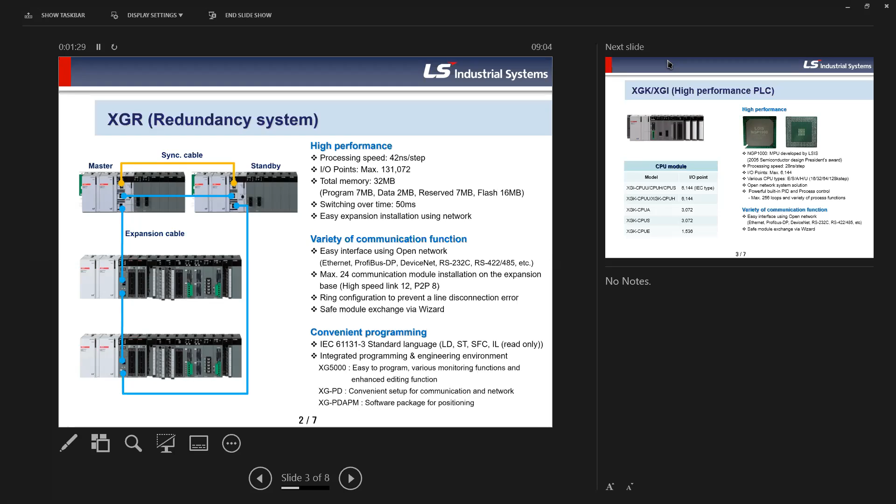It also supports IEC standard language programming. And the nice part is the XG5000 supports the entire range of PLCs. So you don't need a piece of software for the XGR, for example, and another piece of software for the brick — it'll be the same software for the entire range.

Then we have our XGK, XGI high performance PLC. This is our number one selling rack with a range of CPUs. As you can see, you've got the CPU-U, CPU-A, CPU-S, CPU-E. Obviously each CPU has its own strengths when it comes to I/O. Once again, variety of communication networks, built-in PID.

Then we've got our XGB, XEC bricks, obviously our number one sellers because of their price point and convenience of use. So we also have fast processing, 83 nanoseconds per step, maths operation, 7-stage expansion points on the XEC, and obviously designed for small to medium-sized systems.

Also comes built-in with 16-loop PID control, built-in 232 and 485 on the SU and the U. On our E, which is the economy PLC, it has 232 and 485, but you can use either or. They also come built-in with high-speed counters, and if you get the transistor version of the PLC, it comes built-in with high-speed positioning as well.

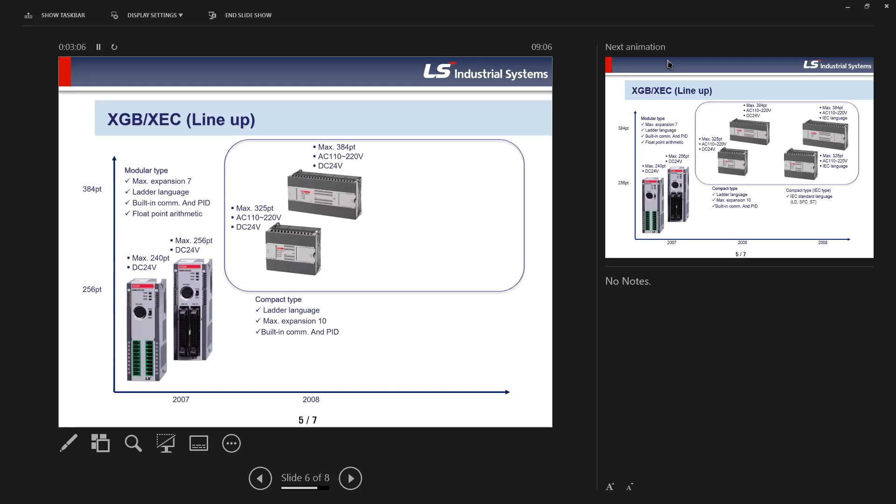First we have the modular type, which is our little PLC, a little cigarette box type PLC. Then we have our major bricks, up to 384-point I/O, starting with the SU and the E.

Our HMIs — actually this needs to be updated. We have our new range of HMIs, which is actually not on the slide, which are the EXP and our IXP2 HMIs. And then we have smart IO expansions, extendable IOs that can all be used with our range of PLCs.

Okay, so that's just a simple little lineup of the PLCs that we have. I'm just going to stop sharing this screen, and then I'm going to go into XG5000.

Okay, so this is XG5000. I've opened the program already. Generally, what happens when you first install XG5000, you're going to have all these windows pinned. So what I generally do is I unpin them, let them sit at the bottom so that you have more space to program. I'm sure you guys notice if you've installed XG5000 already, that all your operational bars are open. So in that case, I just minimize them so I got a nice clean screen to start with and make things a bit easier to program.

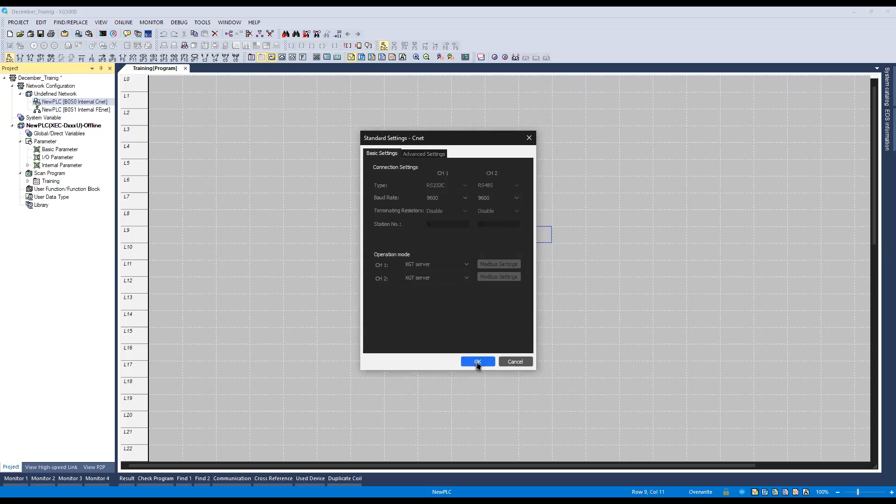Okay, so we're just going to leave it as XGT server for now. Say okay. Okay, then if we double click on Ethernet - okay, hold on, let me just change my colors so it makes things a bit easier for you guys. Give me one second. It's not the best theme.

Okay, that's much better. Okay, so under Ethernet settings, we got a station number. Station number is related to when you have multiple PLCs connected onto the same network. So obviously, if you want each PLC to talk to each other, each one's going to need its own station number. Then you can set your IP address here to whatever you want it to be. And as with the CNET, you got the choice of XGT server and Modbus as well. So I say okay, we can leave that as default for now.

Then you got your system variables. As you can see, there's nothing in there at the moment. That's when you actually add variables into your system. And then you got your global variables. Your global variables are used if you've got multiple programs in a single project, allowing each program to access a global variable, whereas a local variable is for that particular program only.

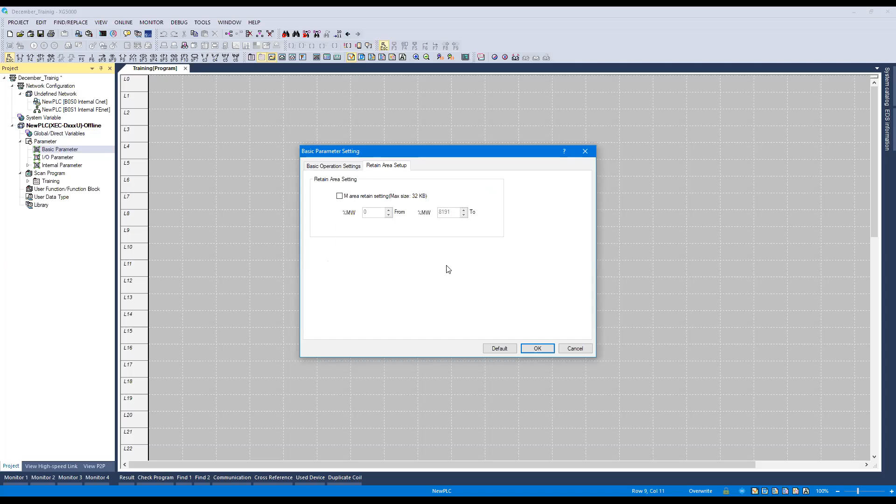Okay, then we have basic parameters. Basic parameters tells you your scan time, basically how long it takes for your PLC to scan your program from top to bottom. And then you have your retain area setup. Retain area is areas where you want values to save after power down. So if you power up, and you got a value in a certain register, let's say from marker word 0 to marker word 10, all values within those addresses will remain after power down. You power back up, you got a value of 10 in there, for example, the value of 10 will remain in there. But there are other ways of doing retains. This means you basically have to structure your program to make sure that your retains stay within that area.

Then you have your IO parameters. IO parameters are important - this is where you add your expansions in, where you add your different IOs in, and where you tell it what PLC you are actually using. So the way it works is you have your base PLC, which is slot 0. On XECU, for example, we got your main, which is your main PLC. We can tell it that it's, let's say, a DR28U PLC. If you double click on there, then it tells you here you have 16 inputs, 12 outputs. So it adds this in. This is your actual brick PLC that you've purchased from us, and that's your slot 0.

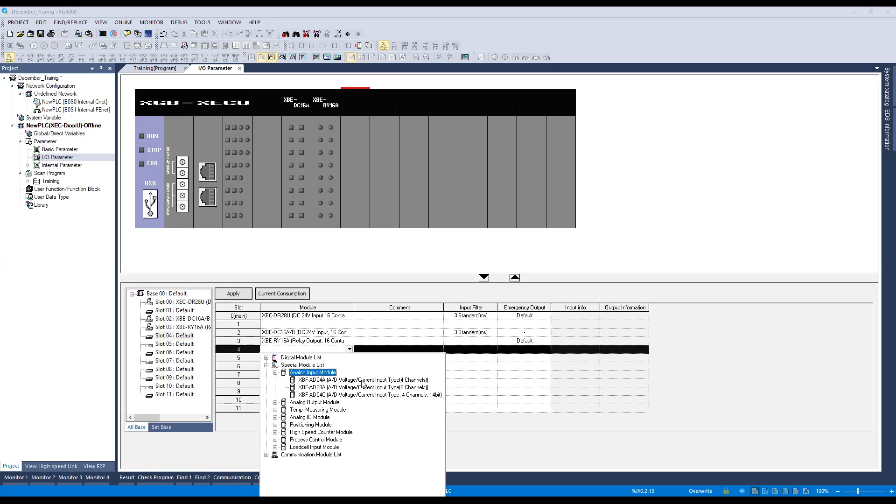Let's also add in an output module, say a 16 channel relay output. It gives you the description there, so you know what it is, and you have the choice of transistors as well. Then let's add in an analog input module, a 4-channel analog input module. And then we'll add in a 4-channel voltage output. You get a DV, which is a voltage output, and DC, which is a current output. So let's just say DV for now.

So what we have in our PLC is our main brick PLC, which has 16 inputs and 12 outputs. Then we've added another 16-channel digital input card, 16-channel relay output card, 4-channel analog input, and 4-channel voltage output card. Very importantly, as you can see, we can go up to 11 expansions if you need to, depending on the size of your project.

So very importantly, what we need to do is click apply. This asks if you want to register your variables. Say yes. This mainly relates to the analogs, because the analogs have dedicated variables to read and write to. I'll show you how these are used in the program once we add them in. Say OK, and that registers your I/O parameters.

If you want to change the settings of your analog, you can still, within your I/O parameters, double click on that. It tells you, okay, my analog input, I want to enable it for channel 0. I want it to be a 4-20 milliamp input. This gives you your range, which is your raw data range. So basically, if you are reading 4 milliamps, you're going to read 0. If you're reading 20 milliamps, you're going to read 4,000. If you're reading 12 milliamps, you're going to read 2,000. That's the raw value that you are going to read.

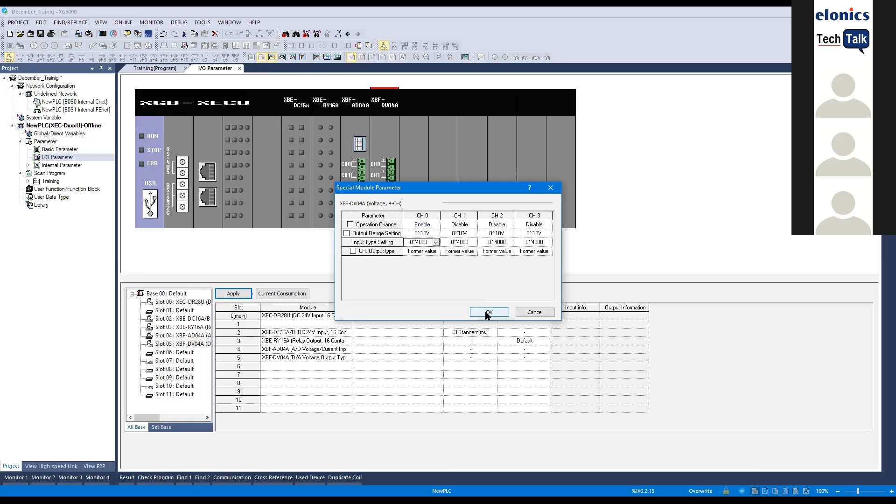So you say OK, let's enable 2 channels here, and apply once again because you made changes to it. As you can see, it didn't ask you to register because it's already registered. You just applied the setting changes you made to your analog inputs.

Now this PLC also has internal parameters. It's got a high-speed counter, which we use for encoders or high-speed processing with proxies, basically any high-speed input that requires to be counted very, very fast. I'll go through that once we do the basics initially. Then we've got a 16-channel PID loop for controlling pressure, controlling speed, etc. And then we have a data log as well.

It's only on an XECU PLC.

Okay, so let's get back to our project window. As I mentioned earlier, your PLC brick, your main PLC, is base 0 and slot 0. Let me just have a look at something.

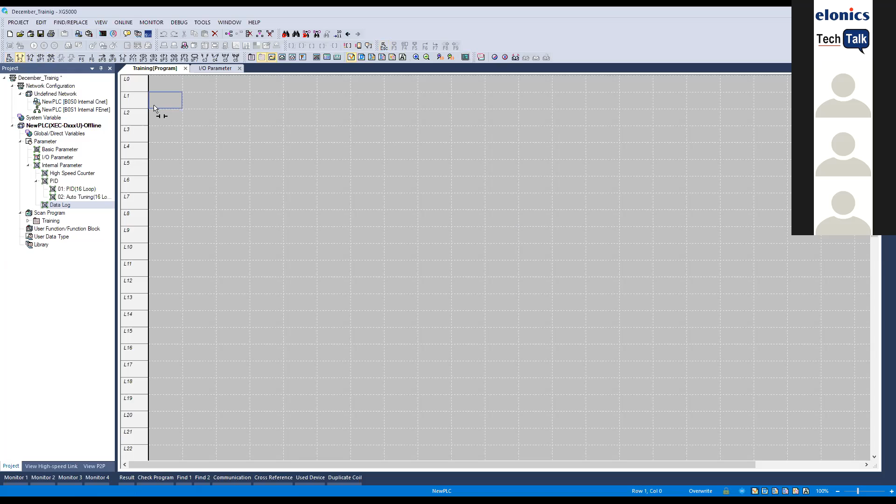So the way that works is, let's put in a contact. As you can see here, you've got normally open, normally closed, a rising edge, falling edge, and little shortcuts as well. So what makes it easier is you don't have to always click on there. If you press F3, you're going to get a normally open contact. So let's click on here.

So what this does now, it opens up your variable window. Right now it's listing all your global variables that are listed here, and these are all your analog global variables that were automatically created when you added them into your IO parameters. So we're just going to create a local variable for now. As you can see, there's nothing in the local variables because nothing has been created.

So initially, we can give the variable a name. I've created a normally open contact, and we want to give it a name. So let's just say we'll call it the start button. If you look at the names, the PLC program does not like spaces, it accepts underscore or no space at all. So to make programming a little easier to follow, you can put an underscore in and say start_button.

Say OK, so it pops out now. Because it's a contact, it's going to be a Boolean. A Boolean is on or off, it's not going to give you a choice of anything else. A variable, it's a variable constant - obviously it's not going to be a constant because it's going to be a contact that's changing. And a variable external is when you set it to a global variable. But right now, we're going to work with a local variable just for the single program.

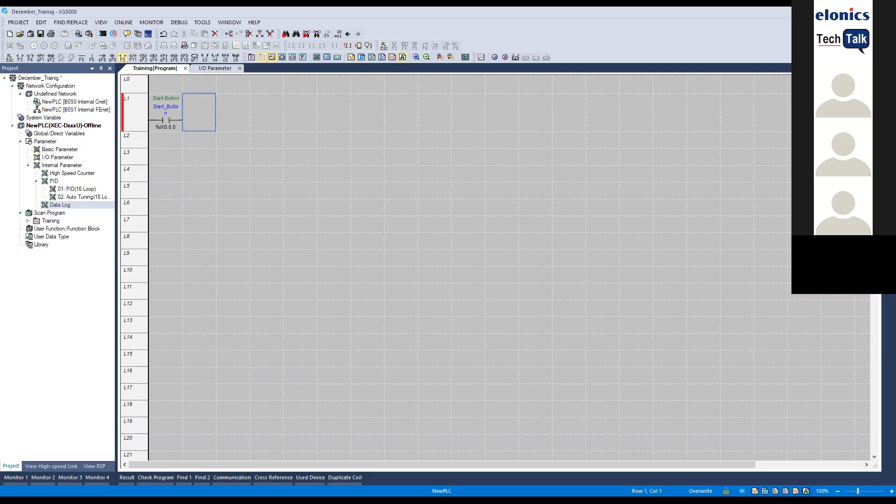Okay, so now we've got a start button. Now we want to give it a coil, an output. So you can see here, coil, F9, go there. Click anyway, it's going to load it on anyway, and we can say motor start.

Say OK. So now obviously this is going to be an output, but once again, it will be Boolean because it's an on-off - it's going to start or stop. Now we're going to give it an output address. Outputs are very similar to inputs, except it's going to be a Q. Q is for outputs. Let's say we want to use Q0 as well, the first output of the PLC. So it'll be base 0, slot 0, output 0.

And we can call it motor 1. Let me unpin this so we have a full view. So as you can see, you've got your start button. If you press it, if your start button comes on, your output's going to come on.

Oh, good. But now we also have, okay, great. So let's create a little latching circuit as well.

So let's say we want to put another contact in there. You see that your motor start, the variable that you've created, is available for selection, so you can double click on motor start. Let's join a line, you can use a line there using F6, click on there. So what this means is, if your start button comes in, if it's a push button for example, it'll pulse, it'll start and it'll latch.

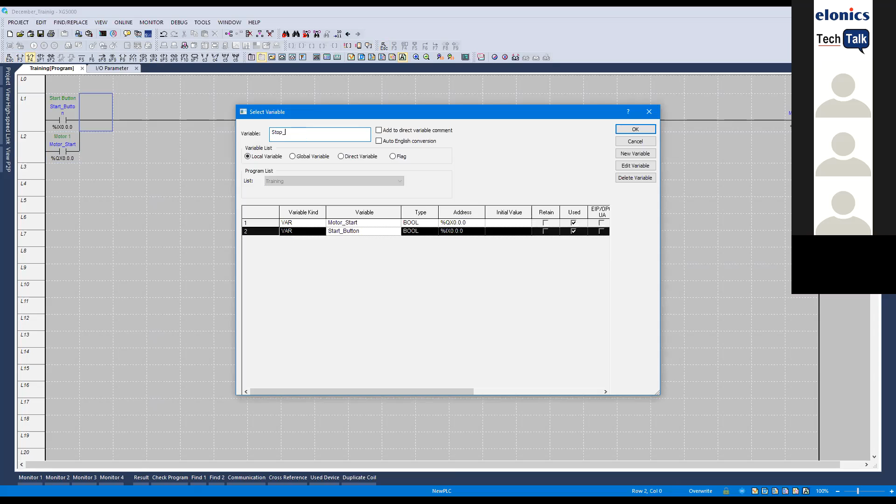But obviously you need to break a latch, so let's say stop button. Press enter, and I'll show you here. So, 0.0.1 - this shows that input 0 is start button, input 1 is your stop, and output 0 is your motor start. So when you press start, it'll latch, and when you press stop, it'll unlatch.

So that's a little simple latching circuit. Now, let's say I'm writing my program.

I haven't put a comment for this program, so I want to add in a line. Very simply, you can click on there, on L1, and I actually use the shortcut to add a line. The shortcut to add a line is Control L. So that puts in another line, creates another little space. I want to put a comment to say what this function does, because obviously writing a PLC program without comments and coming back to it later makes things very difficult to follow. So comments are actually very important when it comes to PLC programming.

So if you double click on your line, select comment, say OK, and it gives you your own comment. So we can say this is our main motor start control. This can be anything, doesn't need to be, can be any character. It doesn't need to have underscores, it's purely a comment, it's text as it is. Say okay, so that tells you what that function is.

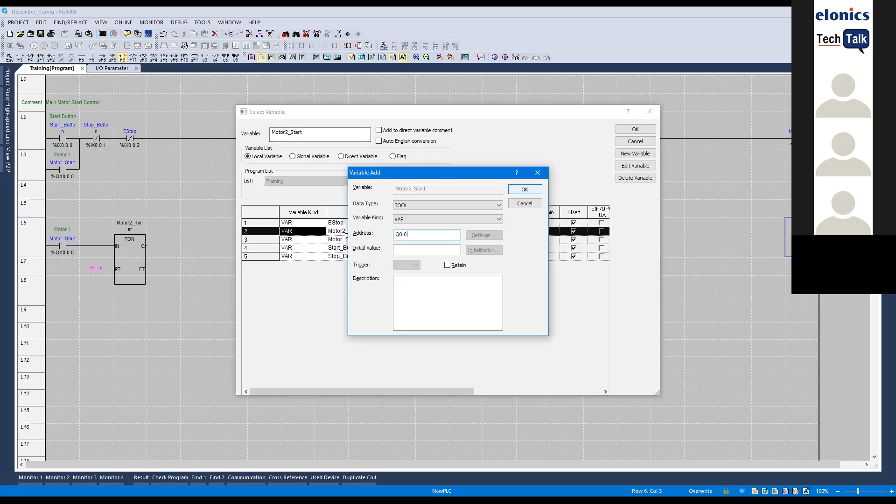Let me show you this as an example - if I say Q 0.0, that's a used address already. If I press enter, it tells me 0.0 is being utilized in the program already, so you can't use that output again. So we change that to 1.

So when our first motor starts, 10 seconds later our second motor starts. Let's add a comment here as well - let's say motor 2 delayed start.

Now we want to test our program. It's a little program - since we don't have a PLC connected to the XG5000 software, we don't want to download anything yet. We just want to make sure our program is healthy and that the function actually works.

You can use the little start-stop simulator button in here. If you click your start-stop simulator, what this does is build your program and simulate exactly the same window as you would write to a physical PLC. So say okay.

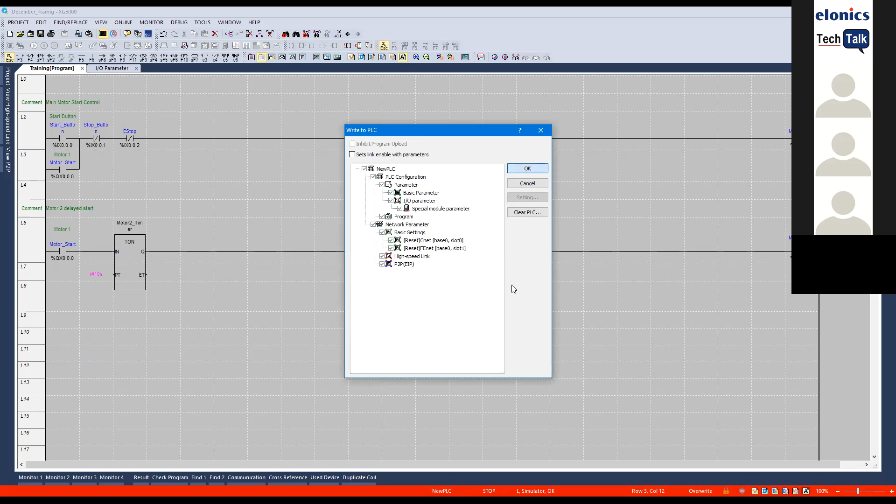Writing completed, and now your PLC is in run mode. As you can see here, you've got a little run button, stop, and it is in monitor mode. These two are normally closed, your stop button and your emergency stop, so it shows blue that those contacts are closed. Now the PLC is in run mode, and at the bottom you've got your green bar showing the PLC is in run and in simulator, and everything's okay.

Now, if I double click my start, technically it should start. But as you can see, I'm trying to force it on, and it's not working. The reason is because this is allocated to a physical input, so it's looking for the input from the PLC.

Double click, nothing happens. So the way we want to test it is we need to tell the PLC we want to force a digital input to come on, one that is allocated. So we go online, say forced IO, enable the force input, say apply, and OK. Now if we double click on there, go to forced IO, say enable and true.

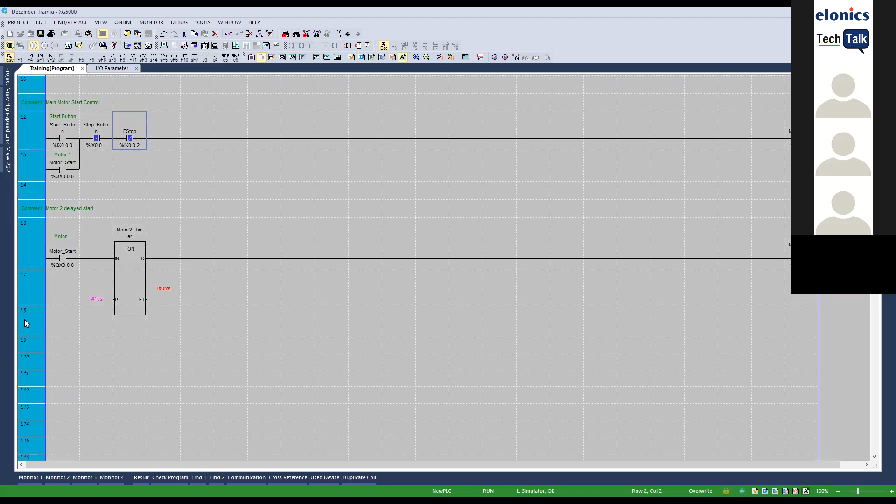You have a little icon here that says start online editing. Click on there, and you can see the bar on the side now changed to blue — that shows you're in online editing mode. So we want to change our emergency stop to another address. You can say eStop, go to edit variable, and we want to make it input 10. Say OK, and immediately the entire screen changes blue to show you that you've made an edit.

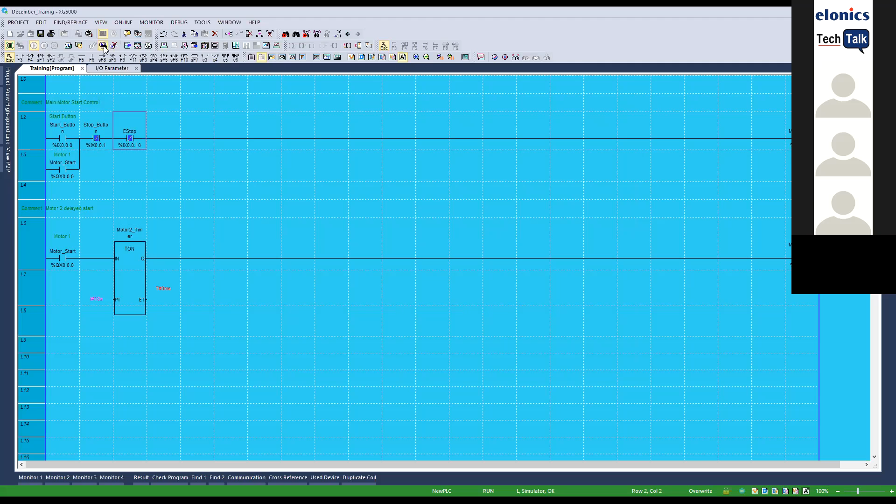Say OK. Now the edit's been made, but it hasn't been written to the PLC yet. To write it to the PLC, click down here, write modify program. It writes it to the PLC — modify program successfully written to PLC. It's still in online editing mode, so you want to come out of it. Yes, and now you're back to your main program, monitoring your program as you would on the PLC itself.

So remember, although I'm doing this in the simulator, the same thing can be done when you connect to your PLC. You're monitoring a live PLC on your plant, but your customer doesn't want to stop his plant and you need to make a small change — you can do that. So to stop the simulator, click on there, and then you're back to your programming.

Any questions so far? That's good. Okay, so the program is quite versatile. Obviously there's many lines — sorry, go ahead.

Yeah, so this timer, this is the input function, right? Yes. So when the input bit in this motor start is on, this timer will start. Yes. So this timer function we can use as an output also.

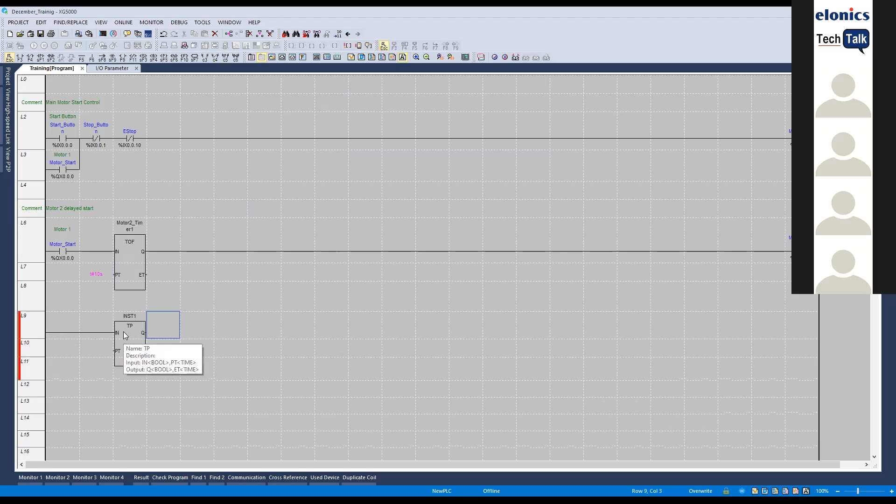Then the other common timer we use is a pulse timer. I'm pressing F10 to bring up the function block window. Type in TP for your pulse timer. So TP is a pulse timer. What a pulse timer does is all it requires is a pulse to start it. So it doesn't require an always on contact, it can require a rising edge, an input that goes from off to on or from on to off. So all it requires is a pulse to start it.

Once it gets a pulse, the output stays on for that duration of time only. So if you got an input that comes from off to on, it'll switch the output on for, let's say, 20 seconds. It'll keep the output on for 20 seconds and then switch off. Even if your input stays on, the pulse timer will only stay on for its duration of time.

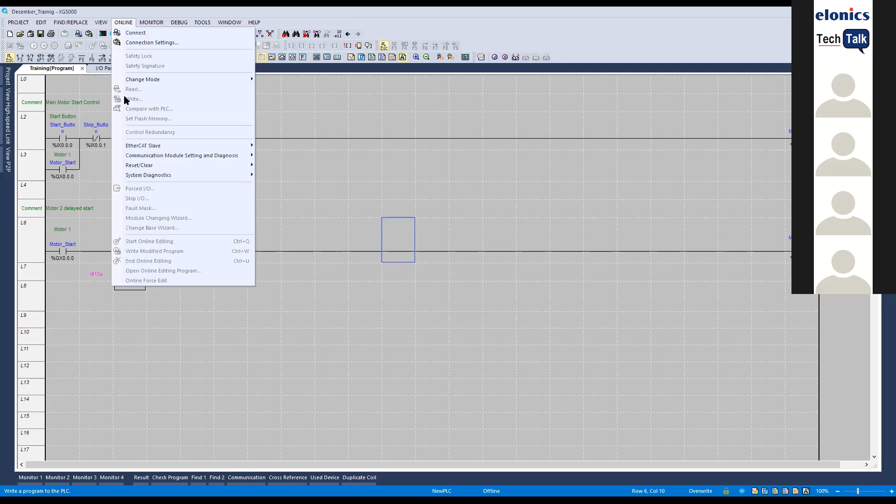So once you select your correct communication method to download to the PLC, you can say connect, it'll connect. Then you go back to online and write to PLC. Okay, so I'm just going to create a little error here.

So as you can see, it's got the red line. So I'm going to say view. Now we're going to check your program before you even write to your PLC. You can click on view, say check program. It tells you what you want to check. Say okay.

I've got this, let me pin this in here, check program. Can bring it up. So it tells me that I have one error. Everything else is fine, but I have one error. So you go through your check window, you see error L02, a device or variable is not entered.

So now, what if you have a huge program and you don't want to go through every single thing to try and find it? What's nice about this, wherever you see your error list in here, if you double click on it, the PLC XG5000 takes you to where your error is. So if I had to put a timer in there, T hash, 20 seconds, error goes away. Then once again, you can go view, check program, no errors found.

Another feature you have is your search function within the program. If you press Control F, that's search for a variable only. So if you know the address of, not the address name, if you know the actual physical address of the device, then you use Control F.

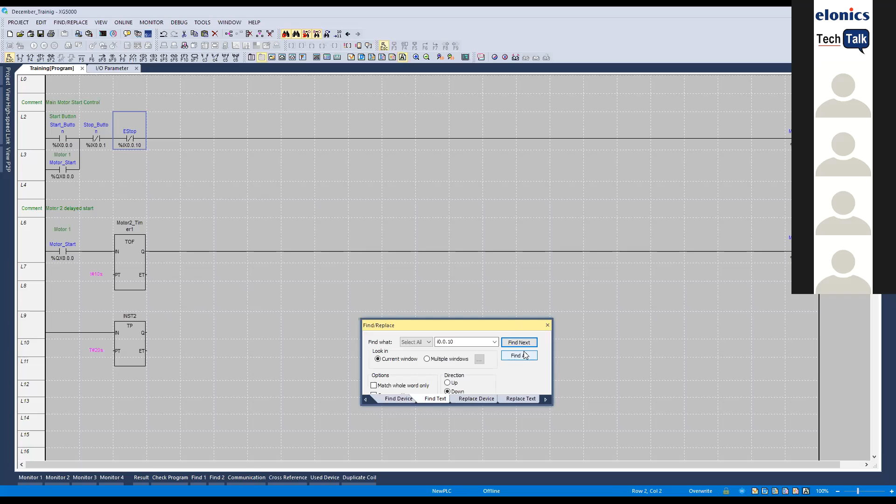Now, let's delete this again. Now, these are just using digital inputs, digital outputs. But what if we want to have variables? We've got analogs. We want to view analogs. We want to view temperatures. We want to write speeds to VSDs. Now, how does that work?

As you remember, in our I/O parameters, we created our analog input, our analog output. So how do we access those? How do we view our inputs? So very simply, I'm just going to create a little comment here to say read

analog input. So now a very popular block that I like to use is a move block because it's quite a universal block. I'm just pressing F10 to open up my function blocks. I want to say move, because the move can look at anything. It looks at arrays, it looks at any variable that can be used. So I use a move block just because it doesn't require an output. So you got your in and your out. It doesn't require an output for it to be healthy.

So I want to view what my analog input is. If I double click on here, remember the analog inputs and outputs in I/O parameters all registered under global variables automatically because you want to be able to access it anyway. So in here, you click on global variable, and here it gives you the list of analog inputs and outputs. As you can see, it shows 4 here because if you go back to I/O parameter, slot 4 is your analog input, slot 5 is your analog output.

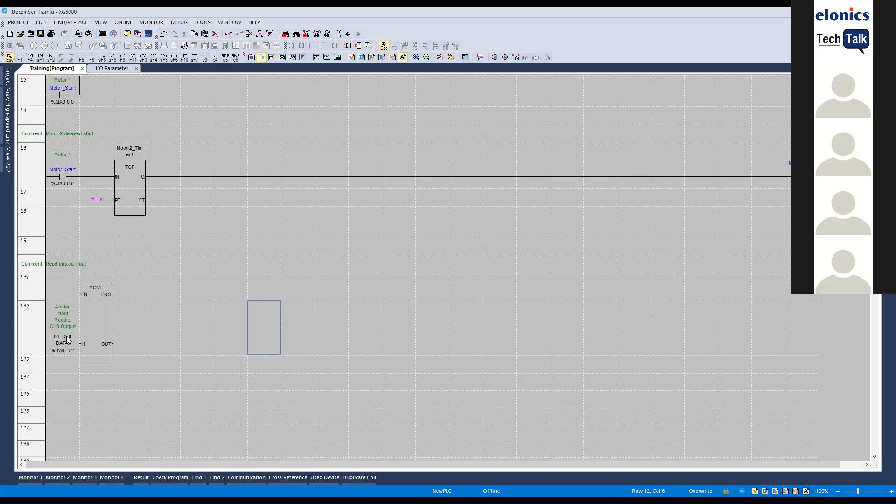So I use this basically as my move block just to test that my values are coming in initially. Before I do any scaling, I check, okay, have we wired up correctly? Are we reading the values? Is the sensor working correctly? If my value is changing here, that means that everything's healthy.

Now, what we can do, what's nice in the XECU, it has a scale block. So I'm just going to press F10 as well. Type in scale. Say OK. So it gives you what the scale block requires. So scaling is X is what is your value, your analog value. I want to take it from there. I'm going to copy that, Control C, Control V. Just going to do it this way.

Okay, then what's your X maximum? We said it's 0 to 4,000. So we're saying 4,000. Your X minimum is 0. Your Y max, so let's just say it's temperature, and our temperature range is from 20 degrees. Sorry, that's a maximum, so it's up to 300 degrees. And our minimum is 20 degrees. So what that will do is at a value of 0, we're actually going to read 20 degrees. At a value of 4,000, we're going to read 300 degrees automatically.

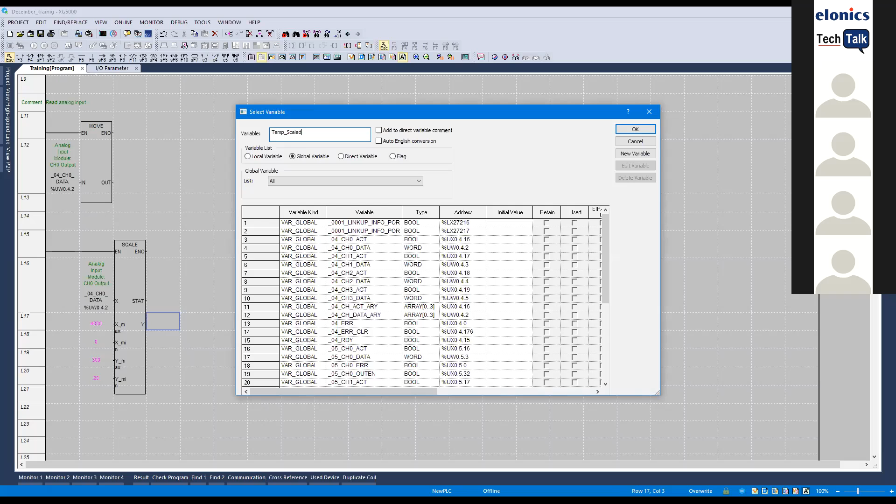So we want to tell, okay, here's our output here, say temperature scale. Now, as you can see here, it's an integer value because our analog input is a 16-bit integer value. So I want to leave that as. Okay, so I want that to be a local variable for now. Okay, integer variable. Okay.

So what that means is that scale block is going to read the analog value. It's going to scale it between 0 to 4,000 because that is the value we're going to get anyway, so we don't need to change it. And it will scale your 0 to 4,000 to 20 to 300. That output will be viewed here.

Now, this is a good example to test. We want to view this value here on our HMI, on our LS HMI. So obviously these values need to be addressed. Now, as it's an integer value, how does the LS PLC address values, integer values, double integer values?

So very simply, we're just going to say edit here again. As we saw earlier in the retain areas, we saw an MW. So MW relates to a marker word, and each marker word is a 16-bit value. Let's say we want that value, our temperature scale value, saved at marker word 0. You start from marker word 0 all the way up to whatever the memory allows. You could put marker word 500, it's purely up to you, but as you structure your program, it'll make things much easier. So we'll say marker word 0, and it tells you here now that temperature scale value is now addressed to marker word 0.

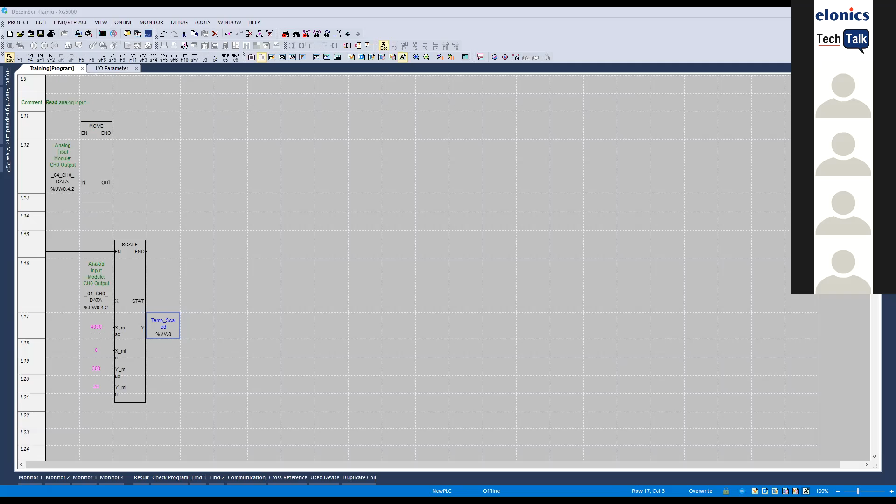Okay, let me see if you can see that. Can you see that now? Yeah, I can see that. Okay, so I just typed in marker word 0 in there. Where did you get the address calculator from? Under tools. Tools, address calculator.

Okay, so marker word 0 is from MX0 to MX15, those are MX1, MX2, MX3, all the way up to MX15. So marker word 0 is a 16-bit register. I'm not sure if you remember your digital systems, but each word is 16 bits and 2 bytes. So that's what this basically explains here. It's MB0 and MB1. So if I had to type in marker word 100, it tells you it's from MX1600 to MX1615, and marker byte 200 and marker byte 201.

Now we also have double integers, which is your 32-bit register. So if I had to do MD10, for example, it tells you it's MX320 to MX351. So that's 32 bits, and now it's 4 bytes, 40 to 43. It's now 2 words, 20 and 21. And MD10, it's long 5.0 to 5.31.

Okay, sometimes that can be a bit confusing. Okay, I'm just going to close that for now. Share my XG5000 again. Okay.

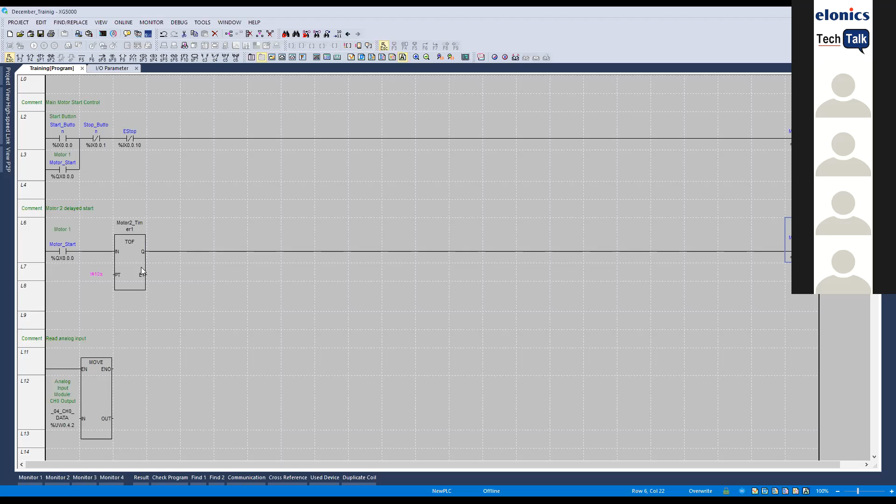So I'm going to create another little comment here: start system via HMI. I'm using an HMI as an example to show how we address it so that we can link the HMI and the PLC together. I'm just going to put another normally open input contact, and I'm going to say HMI start.

Okay, so once again, it's obviously going to be Boolean because it's an on-off. But now this is where the addressing changes. As I put in marker word 0 to read my temperature on my scaling block, now I need an address, a bit address that's going to start by the HMI. It's exactly the same, but marker word 0 now is already used, so we won't use that. Let's say we use marker word 10.

But now marker word 10 is an actual integer value, but we need a bit to start. The Boolean is a bit, it's a start, it's on or off. Now marker word 10 is a full 16-bit register. We just need 1 bit from that register. So to get the bit out of that register, it's as simple as putting .0. So marker word 10 has 16 bits, marker word 10.0 all the way up to marker word 10.15. So by putting 10.0, we are using the first bit of marker word 10. I hope that's clear.

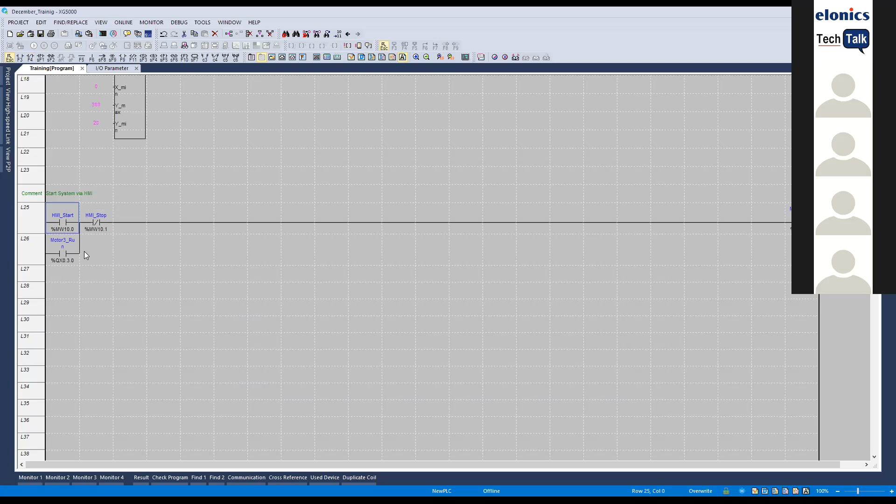And then I'm going to give it another latch here. Click on motor 3 run, join the line. And then I'm going to give it normally closed here and say HMI stop. And now I'm going to give it marker word 10.1. So that's using bit 1 of marker word 10. So you got 10.0, 10.1, Q3.0, 3.1.

Now I'm going to simulate this thing just to show you guys what difference it makes when not using forced I/O, when not using a physical input or output. Okay.

Okay. So as you can see, now we've got our start. But what's different is when it's a bit and not a physical input, as in I0.0.0, if you double click on there, you don't need to go to forced I/O. It's grayed out immediately. Say OK, and it closes immediately. So sometimes when we're programming and we don't have to do forced I/O, we can actually write it without even addressing it.

Click on there to unlatch. And what I mean by not addressing it, this PLC allows you to give it a coil without any address, and it will work. So you can actually create an entire program without addressing anything. So you can test your program fully and then address later. But obviously that addressing later can take time.

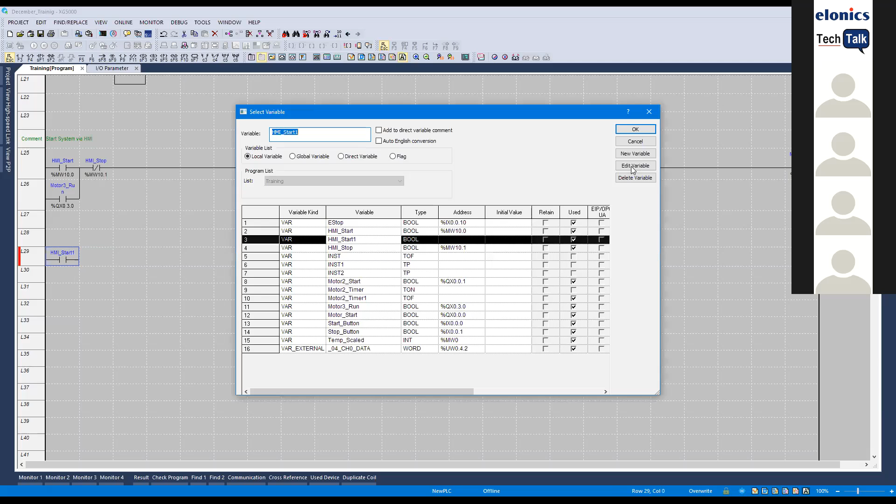So if you want to, it's purely up to you as you program and get used to it, how you want to program. But the XG5000 allows you to create an entire program without addressing anything. You can simulate your program, test all the functions, and then later on start adding your addressing in. And also without having to delete anything, you can just double click on there, say edit variable, and punch in your addresses. You can even go into your local variables within your training program, and list your addresses in there.

So we can actually even double click in there and say marker word 10.2 without having to go into edit as well. So you can create all your variables, have all your variable names in there, and start adding in all your addressing later on. But that's purely up to you how you want to program. You want to add your addressing in at the beginning, which is what I actually normally do. And what I do is normally keep a spreadsheet as I add variables in, so I don't have duplicates. Although it does warn you, I do like to keep an Excel spreadsheet as I program.

Any questions so far?

Can you simulate analog inputs? No, unfortunately not. You can write a value into your scale block, for example, just to see that you're getting values coming through, and to test if your scale block is working correctly. But unfortunately, you can't simulate analog values.

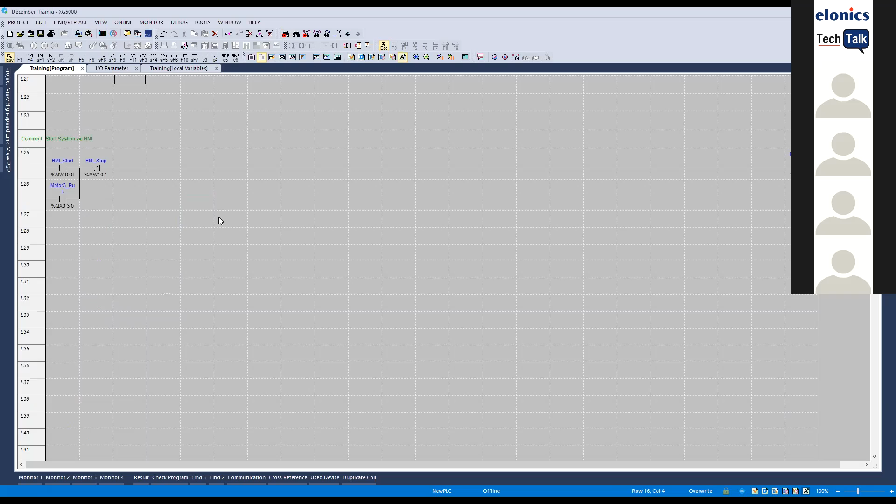So basically, does anybody understand Modbus? Have they done Modbus communication? Okay, let me try and explain how Modbus works.

But we control the speed via communication, which saves you a whole bunch of wiring. So there are certain systems where the entire system is communication—literally just an Ethernet cable between each drive to start and stop it and control the speed. We've actually even done that with the Siemens SIMOCODEs as well, but in that case we're using Ether-IP communication. So we've done a whole range of communication that these PLCs support: Profibus, Modbus, Ether-IP.

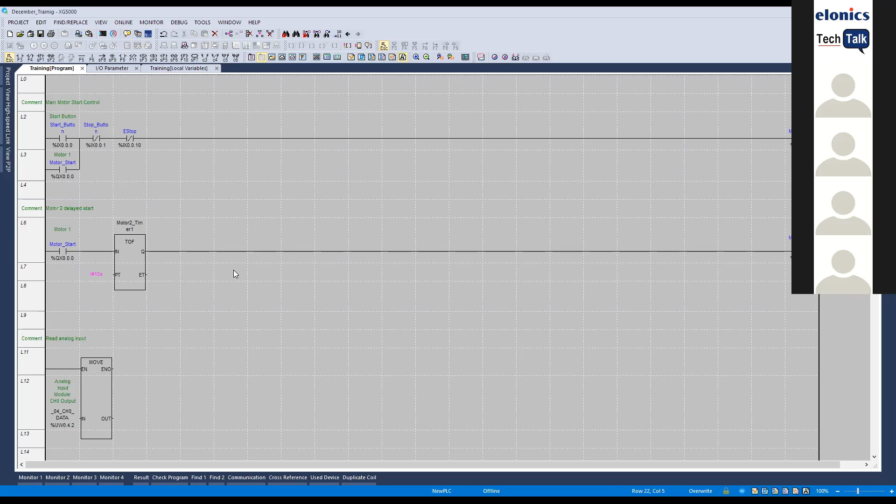We've actually spoken to almost all different types of PLCs as well: Allen Bradley, ABB, Siemens, with the LS PLCs talking to those PLCs. But what we will touch on now is the Modbus communication, because it is the most common, and this particular PLC does support Modbus—we'll look at the Modbus RTU portion of it.

So if we go into our project window, double click on internal CNET, we can use channel 2, which is our 485 for Modbus. Let's use P2P—P2P is peer-to-peer communication, which is what is used for Modbus. And what I'm going to do is use our LS VSDs as an example of communication.

So I'm going to right-click on internal CNET, say add item, and use P2P communication. It tells you it's going to be P2P01. Say OK. As you can see, let me pin that—what it's done is add another pull-down menu for P2P01. I can pull that down further, and now you've got P2P channel, block, and user frame definition.

We're not going to do user frame definition now, just the P2P channel and the P2P block. If I double click on P2P channel, as you can see, because I selected P2P earlier, it shows up here under channel 2. I'm going to tell it I'm going to be a Modbus RTU client. Say OK—driver is changed, existing blocks will be automatically deleted, confirm to continue. Say yes.

And now if you double click on the P2P block, it gives you 32 blocks for communication. So these blocks are your communication blocks to talk between your PLC and your VSD.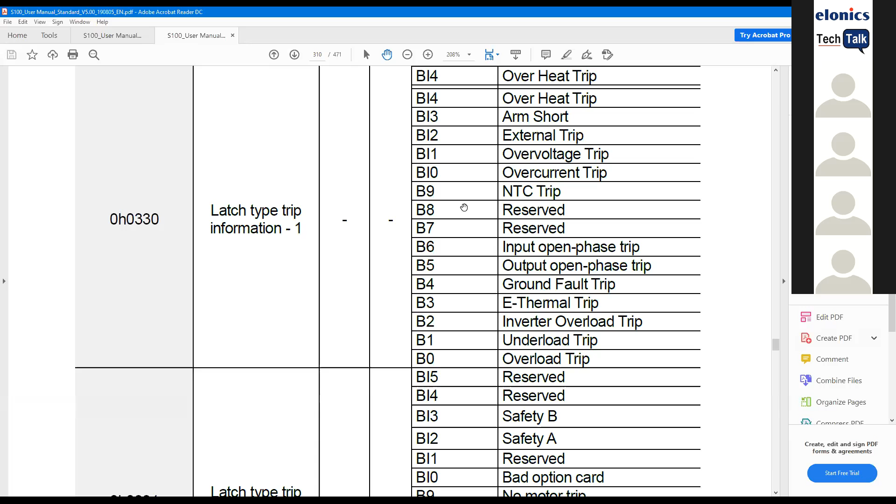Okay, there we go, I'm just going to share this with you guys now. Can you guys see this? Yeah, we can see it. Okay, so let me just make that a bit smaller. So these are your Modbus addresses for your PLC.

For example, I wanted to read the current. As you can see, output current here, and this is your Modbus address right here, it's 0009. So that address is to read the current. If I want to read output frequency, I would read 000A. So it's a hexadecimal value that the LS Modbus requires.

Some devices, like sometimes a Moxa device, give you decimal Modbus addresses. For it to read on LS PLC, you'll have to convert it to hexadecimal. The built-in Windows calculator actually does that conversion for you if required. So we want to read address 9, which means that we want to read our output current.

Now, also, strange thing about Modbus, which I've learned through experience, is that sometimes there are offsets. I don't know why that is, but sometimes Modbus has positive offsets, sometimes negative offsets. In this case, the LS actually looks at a negative offset when it's doing Modbus RTU, meaning that although the address here shows that it's a 9, we are actually going to read 8, a negative offset. So although we're going to say address 8, it will read output current.

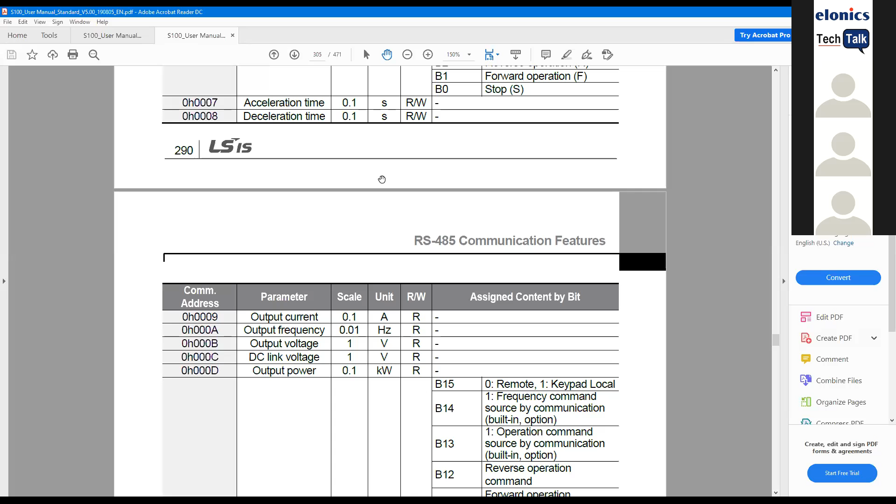So I'm going to say I want to write from marker word 101, and for the address, let's go back into our manual - let me show you that address. So we go back in here and we say command frequency. It tells you here command frequency, and that's on address 5. Once again, it's a negative offset, so I'm actually going to have the address set to 4.

Go back in here. As you can see, it's right - it's already changed that first address to 4. And it's address 4. So that means now we're going to put a value into mark word 101. It's going to write to Modbus address 40004, and it's going to give the VSD a speed.

So I'm going to give another comment here: write speed to VSD1. I'm going to say F10 once again, move. And I'm going to say VSD1 speed. It's going to be an integer value, marker word 101. So what that means is, again, you see it's orange because it's a communication address.

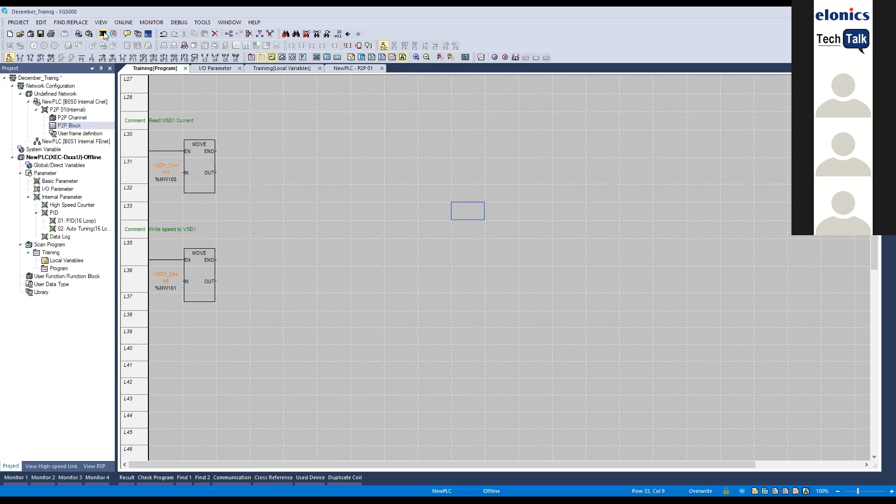If I had to change that value, let's go into simulation. Obviously we're not really going to see this now because we're not connecting to a VSD either. Say OK. And if I had to double click on there and give it a value of 1500, what that's going to do is write a value of 15 Hertz into the VSD.

If I wanted 50 Hertz, I would write a value of 5000. But obviously, you can actually make that dynamic in your program based on temperature, based on pressure. You can make that value change according to your analog input. So as your pressure increases, you make the drive slow down, and so on and so forth.

Okay, so that's your Modbus P2P communication, a very basic portion of it. Obviously it can get a lot more complicated because literally almost every parameter on the S100 drive is accessible via comms. But you must remember that you are limited to 32 blocks. So if you require a lot more VSDs in your system, you're going to have to purchase more communication cards to assist with the extra VSDs and extra data that you want to read from the system.

Sorry, Devin, can you just quickly do an example of reading consecutive addresses and maybe saving them to a marker word to display it on an HMI, for example, voltage, current, and frequency? Yes, okay. Okay, I'm just going to open up the manual here again.

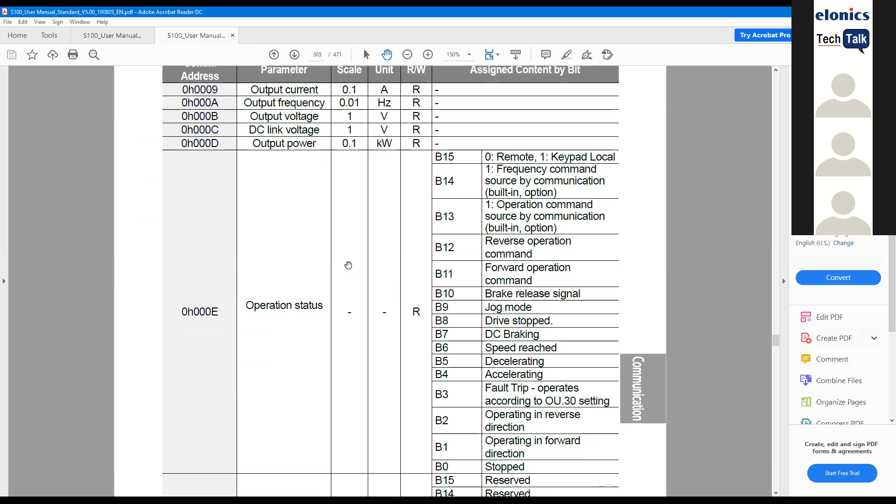Okay, so if we want to read, what I'll do is change we'll read frequency, output voltage, DC link, and output power. So you can see that's from address A, B, C, D. Obviously, it's going to be an offset, so it's going to be 9, A, B, C. So that's from address 9. Let's go here.

So once again, we say 2. We want to read. Let's go T 1 second. Now we're going to say continuous word. Now because it's continuous, it asks you how many words you actually want to read. So we're going to say 4 words from station 1.

Now, once again, we're going to read from address 9. And now we've already used mark word 100. We use mark word 101. So we're going to say mark word 102.

Say okay. So what this is, we're going to read our output frequency, our output voltage, DC link voltage, and output power. So how that works is now we've set 4 words. So I'm going to say read.

VSD1 data. So I'm putting another move block in here. And that's going to be VSD1 voltage. Sorry. It's going to be an integer value, and that's going to be marker word 102.

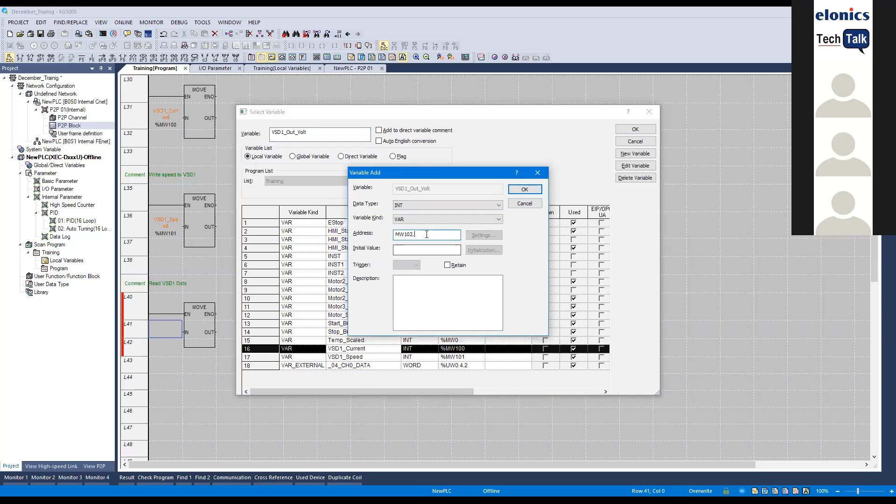Then let's just create another move block here. VSD1 out for DC link. Obviously integer value again, so I'm just using tabs, mark word 103. And that's going to be VSD1 power. Integer again, marker word 104.

So I'm just doing 3 for now. That's fine. Okay, let's do the last one. It's fine, it's just one more.

Okay, so those are the 4 words that we, as we said, our start address is 102 for 4 words. So it's 102, 103, 104, 105. That's your consecutive words that we've told it to read. And that's the 4 addresses in the VSD manual.

So what you can do now is you link these addresses to your HMI. You don't need to put it into another address if you want. If you want to, you can put it into another address, but you don't have to. For any reason you decide, okay, I want to keep the comms addresses on their own. But as I said, it's not entirely necessary.

But as an example, you want to give your HMI a different set of addresses. So HMI out, the in and out has to be the same. It won't work if it's not. And we can say our HMI address is going to be on marker word 200. So that's how it's going to work.

So VSD1, if you're reading from your VSD on that, and you're going to send it to your HMI on that. Well, as I said, you don't have to do that because your HMI can read the marker word 102 directly anyway.

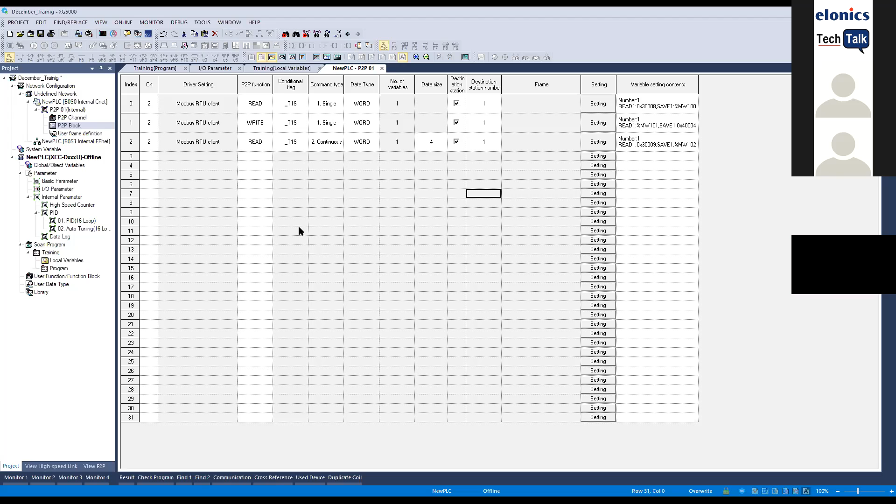Okay, so the next two important functions of the PLC and its built-in are our high-speed counter and our PID. So I'm not sure how many guys understand PID, but okay, let's start with the high-speed counter first, and we can go into the PID.

So the high-speed counter, we use mainly for encoders. But recently I used it for a system where it actually rotated a tin and the sensor picked up the seam to know when to stop. But the tin turns around pretty quickly, so there was a very small pulse that came through from the sensor. And if you wire it up as a normal input, it won't pick it up. It actually just kept on rotating the tin because it never saw the input.

So we wire that up into a high-speed input. On the PLCs, the first 8 inputs are high-speed inputs. So obviously, remember, if you're going to be using a system where you've got an encoder or a sensor that requires a high-speed input, the first 8 are high-speed inputs.

But it's only high-speed if you enable it, if you tell it that it's a high-speed input. So you can wire them up as normal, which is fine if you don't require high-speed inputs. But just remember that if you've got a project that requires high-speed input, you can use anything from 0 to 7.

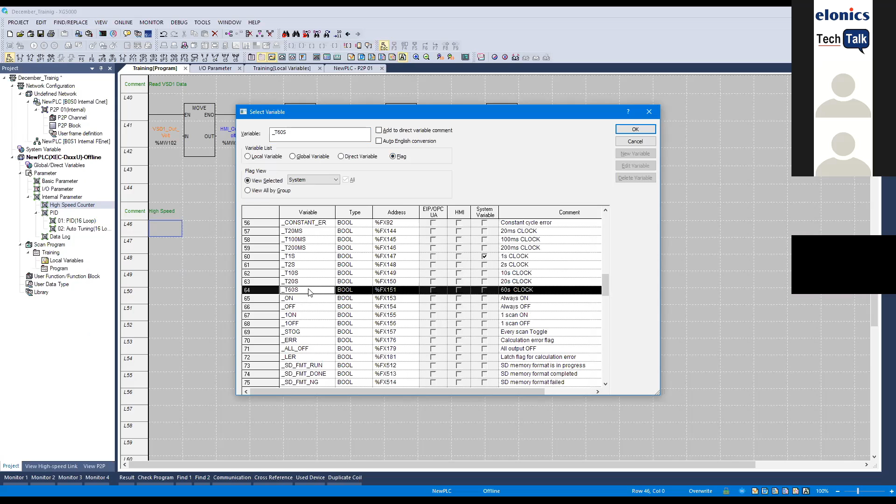In this case, I'm just going to use an always-on block, because what I want to do is enable my high-speed counter. So I'm going to say, put a coil in there. Going to say flag again because it's a built-in function, but you list your built-in functions.

We say high-speed counter, so now it lists every single channel. Now we don't want to look at every channel, we just want to look at channel 0, being input 0. So click in there - actually, sorry, let's not use input 0 because we've used input 0 on there already. 1 is used, 10 is used.

Let's use input 5. So I'm going to go back to my high-speed counter, set that - well, it actually doesn't matter unless you activate it. I'm going to go to input 5, so 1024. Okay.

I want to switch that on, so I'm going to go to high-speed counter. I don't want to look at all, I can untick that and say I want to look at channel 5 only. So now here it tells you count enable, internal preset enable - gives you the whole list of functions related to a high-speed counter for that channel only.

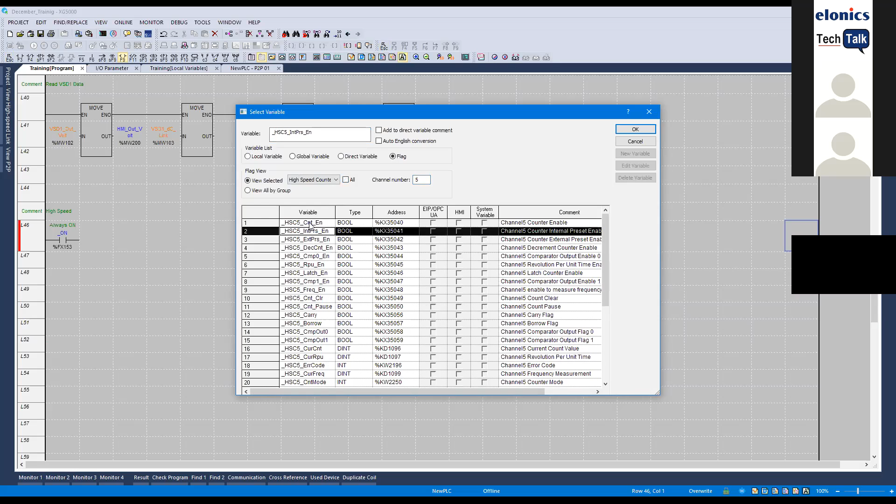So I'm going to go to high-speed counter 5 and enable it. That means now input 5 - this is an always-on flag that's built into the PLC, meaning that that'll always stay on no matter what - and that will keep that output on.

Technically, I don't have to do that, I can actually just give it a normal line and we'll keep it on. But as a personal preference, I like to have that there - I find it looks better, it's a bit arbitrary, but yeah, it just looks better. Okay, so that enables a high-speed counter, that's all it does. Now you want to view what your count is - once again, I use my move block.

Click on there. Once again, it's under flag, high-speed counter, channel 5. And I am going to look at my current count value. Double click in there. So what happens is now, as long as that's enabled and your encoder starts to turn, input 5 will start flashing really quickly and that'll start counting up.

If you wanted to stop counting, you can disable this input, it'll stop counting. But let's just say it's a continuous process. It's a sheet of steel that's going through. It needs to slow down. Guillotine needs to come down and cut. So that value will count.

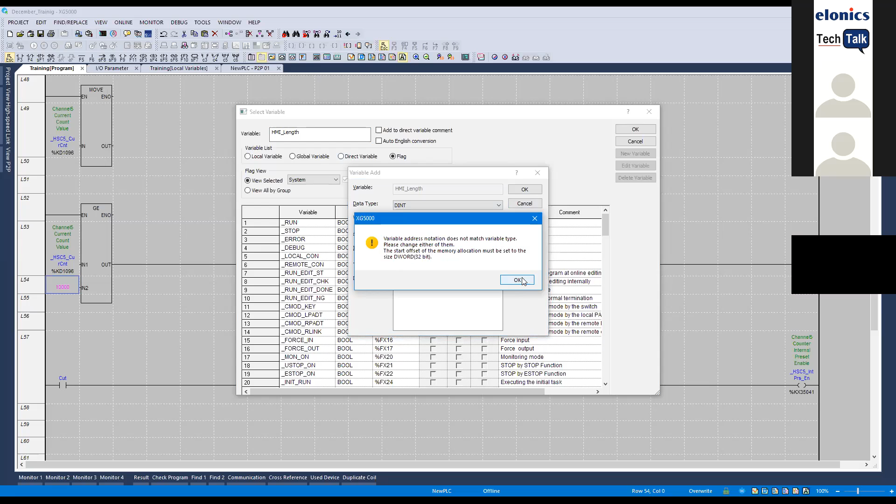It says variable address notation does not match variable type. That's meaning that the double integer is not an MW. An MW is a 16-bit integer. A double integer is a 32-bit integer. So to get that correct,

it's MD. So I'm going to say MD 200. Say OK. There it matches in there. So once again, if we use our calculator, you'll see that MD200 uses marker word 400 and 401. Okay.

So that's basically a little high-speed, a very simple high-speed counter control system. So you count your value. If it goes greater than a certain value that you've added into HMI, it cuts and resets, and then starts to count again.

Okay, so the next complicated one is PID control.

So PID control is built in as well. It says you got 16 loop PID. Scroll through here, you got your 16 loops of PID. You got auto operation or manual operation, but generally a PID you want it to be in auto. Then you got forward or reverse operation. So like in cooling towers, you actually want reverse operation. You want your fans to speed up to cool.

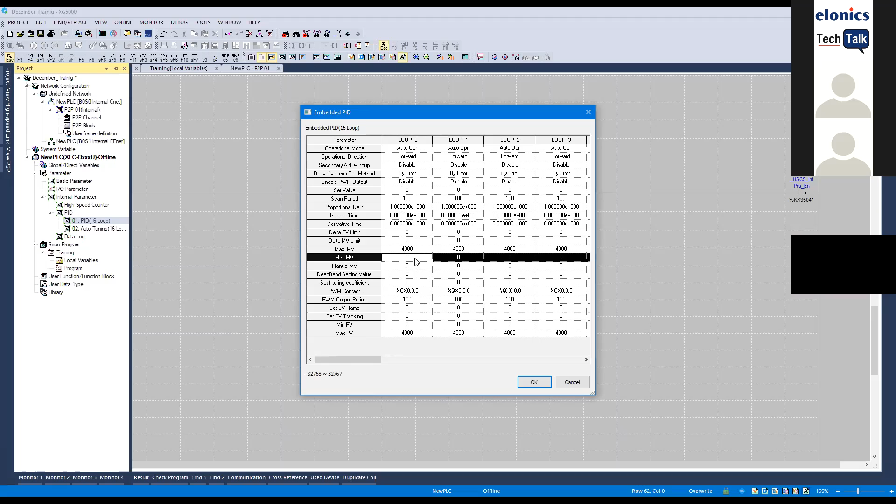The other PID control is purely through analog control, where you see your maximum and minimum MV on here. So basically you got a value of 0 to 4,000, which you can use to control a proportionate valve using your analog output. So as your value changes, your valve will change as well. So you can use PWM for your digital high-speed output, or you can use an analog output of 0 to 4,000, which equates to 0 to 10 volts or 4 to 20 milliamps to control a proportionate valve.

As well as you got your PID values that you can change to control - your proportional control, your integral time, and your derivative time. 99% of the time we don't use derivative because it tends to throw your PID off. We tend to play with our P and our I values, your proportional gain and your integral time. Then obviously you need a set point, you got a set value, and you're going to have a process value. So your set value is your set point, what you want to get to - your set point of 300 degrees as an example - and your process value is your actual temperature, your analog input.

So I'm just going to do a little example now. Firstly, we want to punch in our set value. I'm just going to put another little move block in here. And we want to get the set point from the HMI. So I'm just going to say HMI SP set point, integer value, and we're going to read it from marker word 25, and give it a description as well, temperature set point. Integer. Okay, so temperature set point, and then we want to write that.

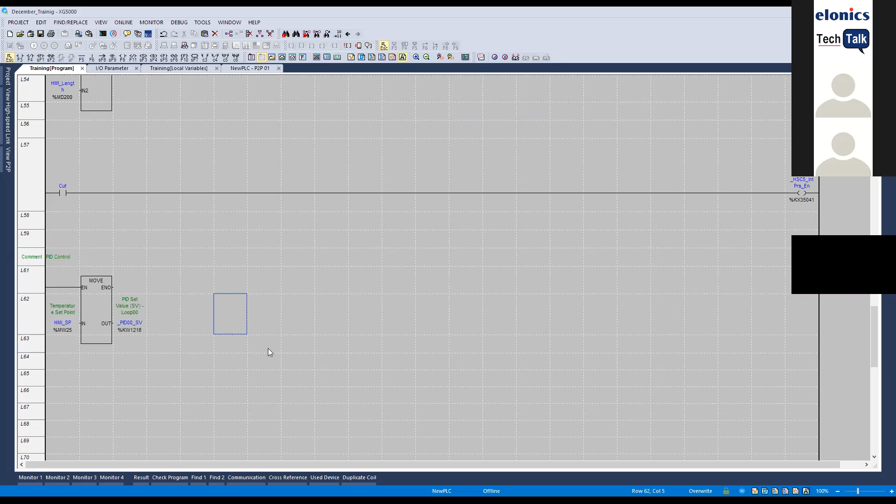The PLC also needs to read the process value, which is your actual temperature, which will be your analog input. So we can double click on there once again and say, this time we'll go to our analog input. Now let's just say channel 1. And this we want to move to our process value on our PID. So this, our HMI gives us a set point into the PID of the PLC, and our analog input gives us the actual temperature. So you got your set value and your process value.

Then you also want to be able to change your P and I values.

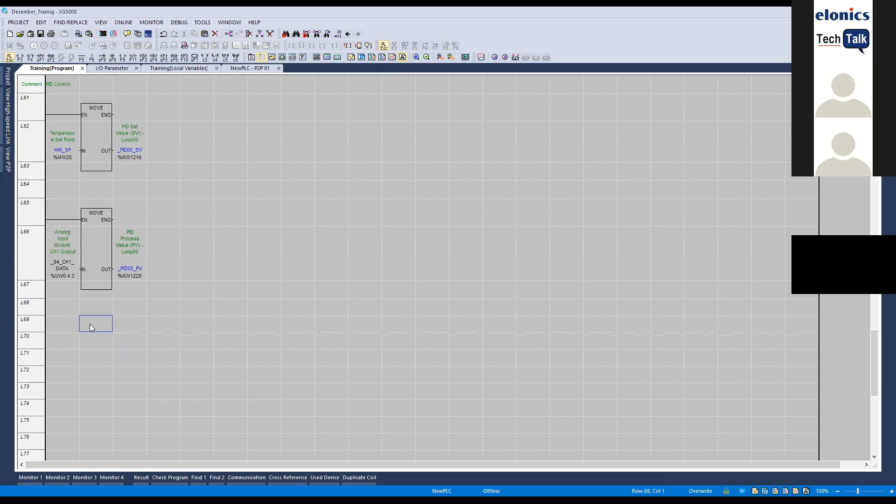Okay, so once again I will use my move block. I'm going to say HMI P. Now, your PID values are real numbers, so I have to go in there and tell it it's a real number, because it has to be so precise, you can go down to decimal points. This is why we actually use real numbers.

And then you go into flag, go to PID, station loop 0 again, and KP. So that writes from the HMI, a real value to a real value, for your P value.

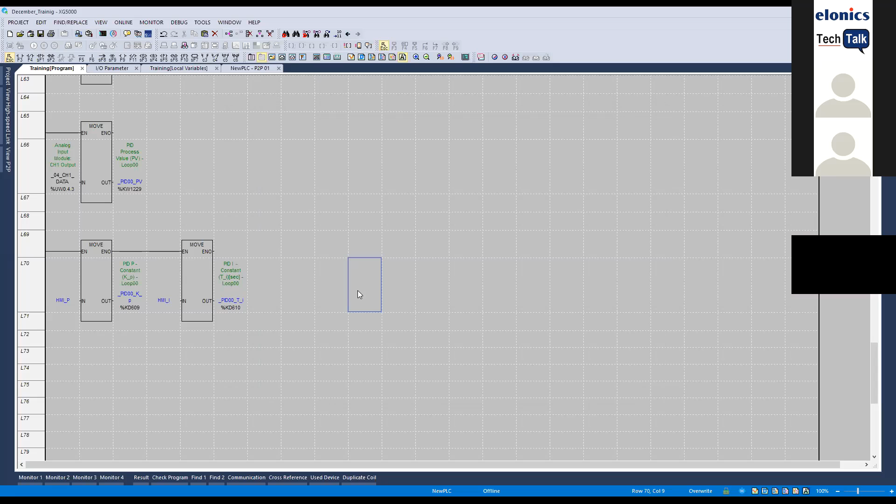Let's put in the I value. HMI, again to real, and your I value. So you can change those values as you go along, because with PID, if your proportional is too high, you can overshoot and constantly hunt. And if your I is too high, then it's going to take a long time to actually get to set point. So PID does require fine tuning.

Let me just draw a little diagram for you guys to get an idea. Clear all this. There's a little clear button. Okay, so...

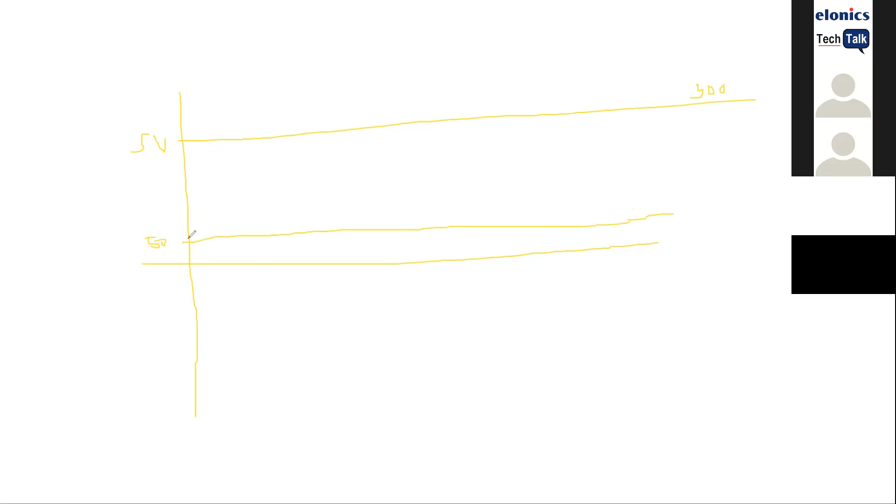PID works in this sort of fashion. So you've got your set point, which is your set value. Let's say it's 300. And we want to get from, let's say this is already at 50 degrees here. We are sitting at 50 degrees currently, and we want to get to 300 degrees. So you activate your PID, the system will come on, and based on your PID settings, your temperature will start to increase. The ideal PID is to increase and then match your set point.

Now, if your values are incorrect, you can spike and go too high and overshoot, and then constantly try and hunt, and eventually try and get to set point. So that's why when it comes to PID, tuning is actually quite critical in the system. The system does support auto tuning, but it purely depends on the process itself, because sometimes processes are so reactive that it's easier to manually tune, and some systems are so slow that it's easier to manually tune.

Whereas systems where your temperature is going to work quite steadily, auto tune works quite nicely. So if you have a very high integral time, what can happen is that your temperature can stay low for a long time and take a long time to get to set point. So in your PID settings, you can tune your PID, and as I said, the PLC has 16 loops, so you can have multiple PID settings for different functions of your machine or whatever your machine needs to do.

Okay, anybody have any questions? As I said, these are just basics of the basic built-in control of this thing. Obviously, when you guys need to use it and you're struggling, then I will help you guys. That won't be an issue, and we can work on it together as we go along.

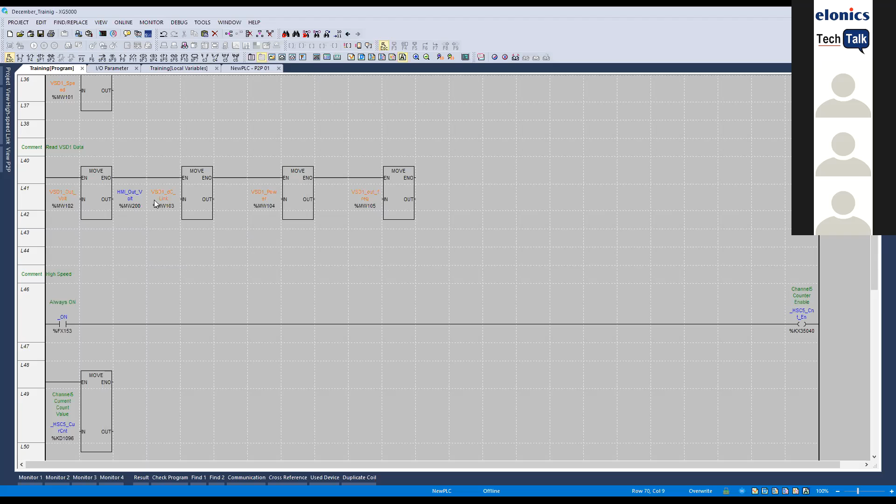Unfortunately, I don't have a PLC here, but very simply, it's done by project open from PLC, as simple as that, and you can upload from your PLC. There's nothing fancy about that. Obviously, if you've got USB connected, then you can select what sort of function you actually are going to use. So I can use USB, 232, Ethernet, and it'll read from your PLC.

Okay, does anybody have any questions? Any questions? None from me. Oh, good. We'll just have to work through this again.

I see you're recording, so I assume we can look through this. Yes, definitely. And then also, if you guys are struggling, you have my number, give me a call, we'll go through it. If I'm not available, I have other guys that can help as well. So we definitely will assist. We don't just sell a PLC and say, no, it's up to you now. So we'll assist as far as we can, yeah.

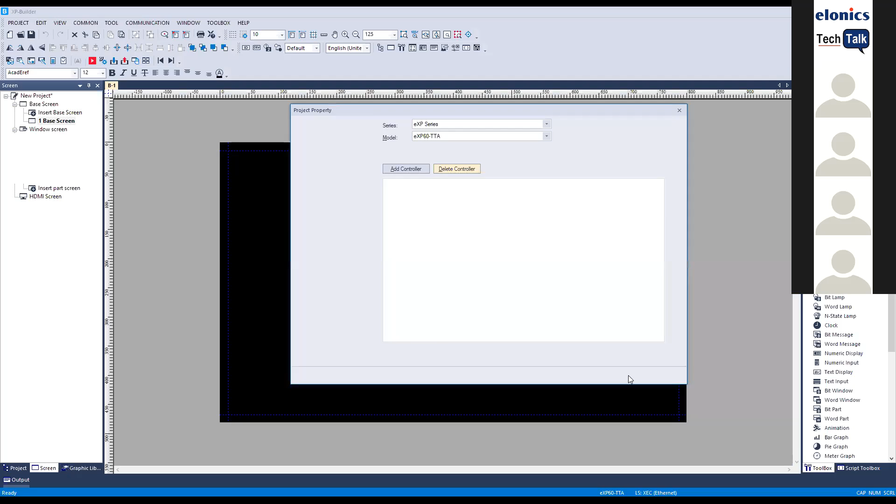They'll pop up, and it tells you once again that you can add multiple controllers to your unit as well, but we'll keep that for the more advanced courses. So we're going to make it an LS product, LS Ethernet, protocol Ethernet, and then we can go to detail settings.

And this IP address here is the IP address of the PLC that you are going to connect to. So it's not the IP address of the HMI. The IP address of the HMI is set on the HMI itself. So when you initially power up an HMI, it comes up with the engineering menu screens where you can set your IP addresses, your timeouts, your connections, and that sort of thing, all in those settings.

You can even do calibrations, touch calibrations, color calibrations, and that sort of thing, well color tests. Say okay for now. A nice little thing here is called Use PLC Simulator. What's awesome about that is, without having a physical HMI or PLC on your desk, you can actually start your PLC simulator, start your XP Builder simulator, and the two systems will link. So we're going to tick that for now because we will be using it.

And then we've got our screen settings. Screen settings tells you which screen number you want to start at. So if you are programming, you realize, okay, my main menu is now sitting at screen 10. You can change that initial screen number, so when your HMI boots up, it'll go to the screen number that you specify here. But once again, in the engineering settings of your HMI, you can actually set that value there as well.

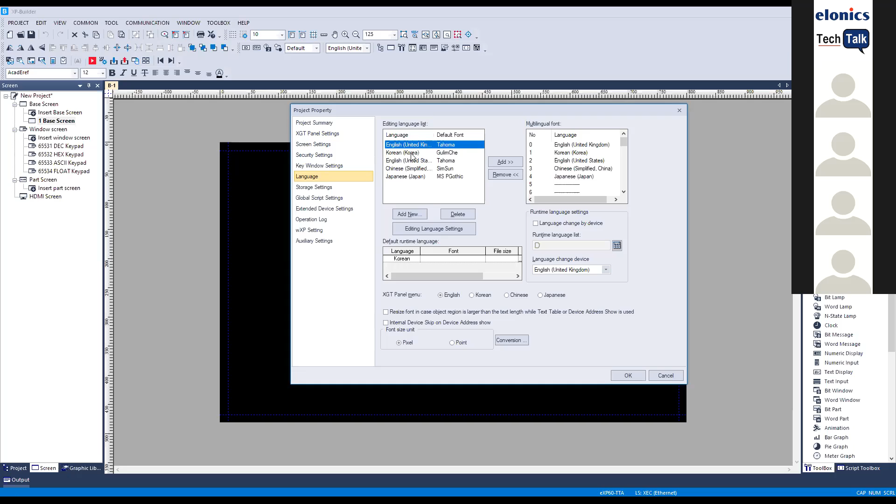So I just set it to 0 as a personal preference. In your key window settings are built-in keypads. If you look to the left as well, you go to decimal, hex, ASCII. Those are all windows that pop up automatically if you want to enter a value or whatever it is. Then languages - obviously we are South African, so we generally stick to English UK. We can delete the other fonts if you don't need them as well, up to you.

Storage settings - generally everything's stored to flash memory unless you want to store your alarm data, logging data, recipe data. You can select into USB or SD card. But remember, these are purely based on the model. So your EXP does not have a CF card or SD card, but it does have USB memory, so you can plug in a USB card in there to save your recipes.

Then you've got global script settings. The HMI support and XP Builder support basic C programming for scripting. Extended device settings for barcode scanners and printers. Operation logs if you want to log that data.

WXP is a remote access, which we don't recommend. We have another piece of software called XP Remote, which is much better than WXP, because WXP is actually not free. So I recommend using XP Remote, which is a free piece of software. XP Remote allows you to connect to your HMI remotely and control it remotely via your PC or laptop.

Okay, so what we have now is our base screen. This is what it starts up with. I think when the guys initially install, I tend to take out my grid, but it will look like the way it is now. And you can, once again on XP Builder, pin and unpin your toolboxes - your script toolbox, your figures, your objects.

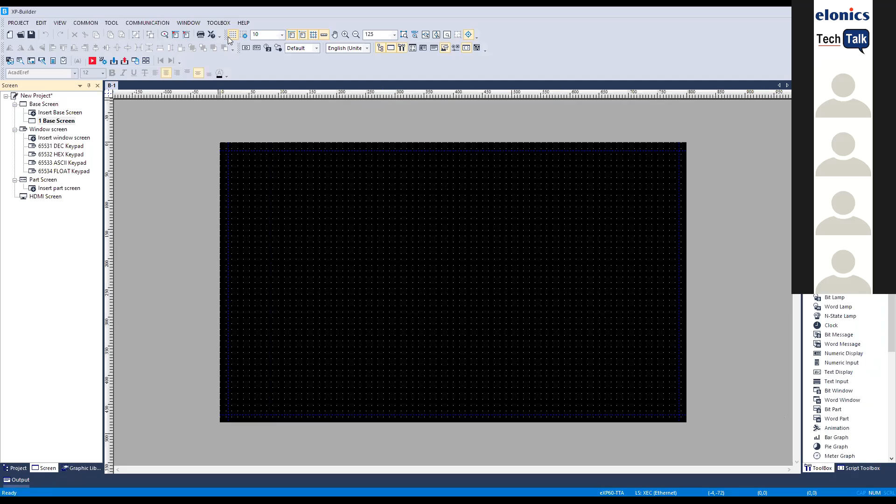You can pin it the same as your object, your screen information, your project information, and your graphic library. So you can lay it out as you want - it's purely up to you, each person has their own preferences. So I tend to keep my grid off because I think it looks cleaner, but it's up to me. Sometimes the grid's handy when you're trying to draw lines and designing your screen.

So in your screen window, what it tells you is your number one base screen. That can be renamed - you right click and say rename, but importantly it must have a number or it doesn't know how to allocate it. So you can say 'M main screen' as an example. And if you need to add another screen, just double click on insert base screen, and you can rename that as well to 'settings'. You can add as many base screens as you want.

Okay, so if you want to add window screens as well, you can. Window screens are used as pop-ups, as with the keypad. So I had to double click on this here - this is the built-in keypad that they give you, and that pops up whenever you've got a numeric value that you want to enter. Okay, so you can close that for now. So we've just created 3 little screens in here - that's how you insert and name your screens.

Very important to name your screens. I actually went on a breakdown for a project that another customer did, and literally the system had about 40 odd screens, and every single one had 'base screen 1', 'base screen 2', 'base screen 3'. So trying to fault find and get to the screen that you want, I had to go through almost every single one to find what I needed. So if your screens are properly labeled, that's good engineering practice - it makes things a lot easier to fault find.

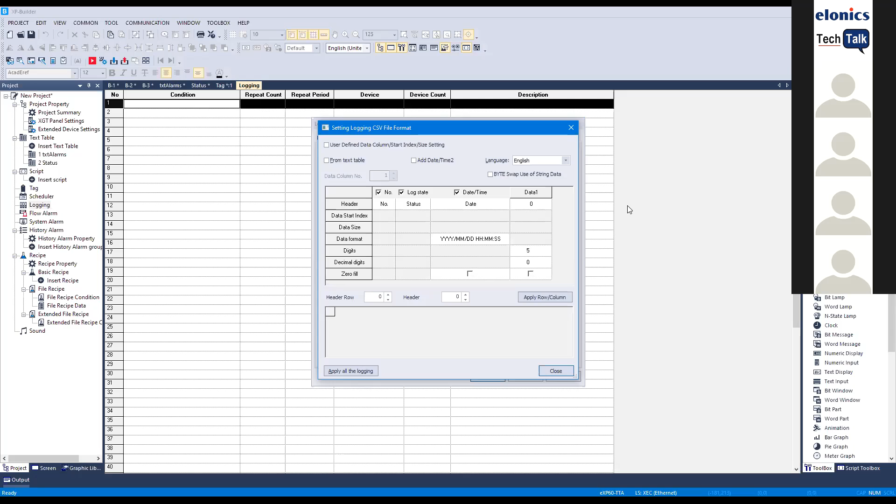A log on common property. All this does is tell you how much memory you are going to use. So for a single bit, one device, repeated every 50 times, it tells you that I am going to be using 1,224 bytes of memory on the HMI. This is just a calculator to help you determine how much memory you want. I want to make that 1,224 to match what's there.

If you had a word and repeated it every 50 times, that's 918 bytes. Generally we can actually make this as high as it can go, I think it's 2048, and then it'll be fine.

Okay, apply. So it shows you here, we got a bit device, and every second it'll log the start button.

Flow alarm is literally what it says. It's a flow alarm that flows across the screen. Number of devices you want to monitor, so your e-stop, your trips, that sort of thing.

But you can either, if you have it as continuous, let's say you structure your program correctly, so all your faults are on a single address, like marker word 35. Remember, it's bit only, so marker word 35.0, 35.1, 35.2 - VSD1 trip, VSD2 trip, VSD3 trip. If you put all those consecutively, I'm just going to use one as an example here.

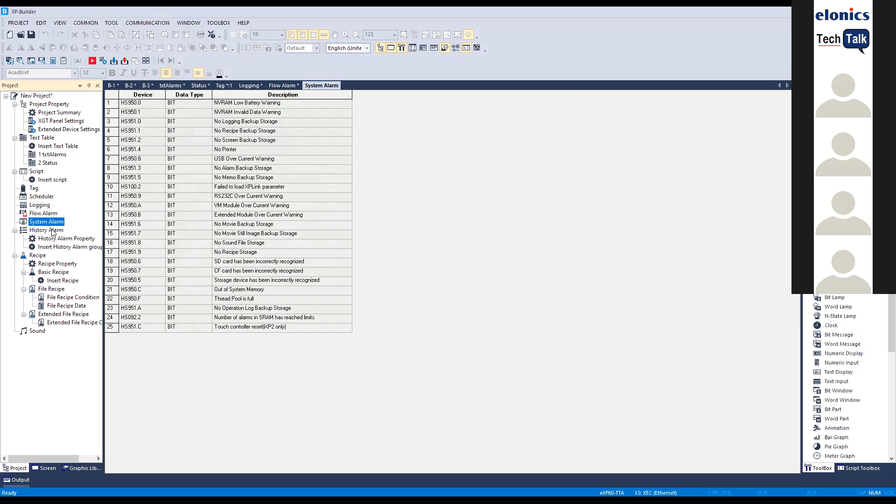Then we got history alarms. History alarms are obviously important, so you can back those up to USB memory. All this is purely based on how you structure it, which means it's actually difficult to go through all of this without an HMI and an actual program that goes with it. But you can add your text table in.

I'll show you, when we go into the design, where the alarm history actually gets loaded in and how it's actually linked to that.

We also support recipe functions, and previously HMIs never supported recipe functions, so you had to do an entire recipe control via your PLC. Now you can do your entire recipe function via your HMI.

So you can tell it a button to save, a button to load your recipe, what recipe, basic file, extended file, read write. It gives you a bit to tell you it's finished reading or writing, so you can go green, red, for example. Then recipe numbers, block numbers, and you can add multiple recipes into your system with multiple words.

But that, when it comes to that, yeah, that's more on the more advanced side. Okay, so let's get back to our screen. I'm going to close all this now.

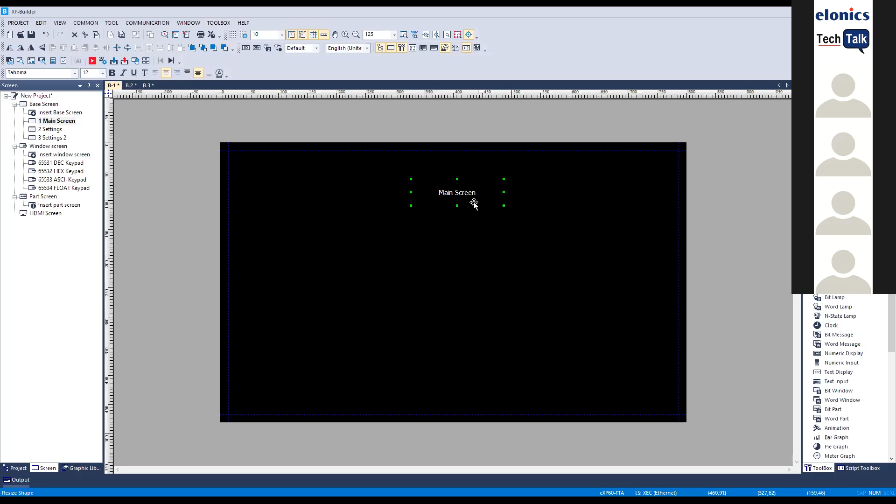Sorry about that. So, create a main screen. Just a little text block, doesn't affect your program in any way, just visual. Double click on it, give it a different size, transparent text plate. Just say I want it to be dark green, white text. Say okay, and you can do that. So that's basically starting to design your screen, how you want it to look. Colors, text, fonts, all up to you.

We can add a clock in as well. So in your object window, you can click clock, click on there. For now, we just want to view the time, and I don't want seconds, say okay. Display, I want it to be transparent, so it doesn't look blue like that. Text, we can leave it at 14, say okay, and you can drag it to that point. So when you download to HMI, then this is what you're going to see initially.

Okay, so you can draw lines, click on a line, draw a line. It's all design completely up to your preferences. Circles, rectangles, round rectangles. Images I'll come back to because I want to show you guys how to add logos and external images into the system.

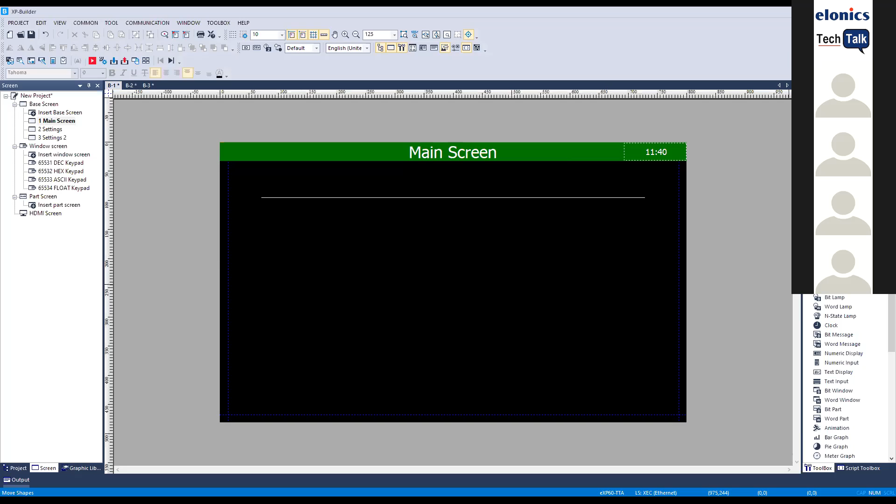Okay, so bit switch is, as it says, a bit switch. You can click on it and it gives you your action type. So you want on, you want off, momentary. If you press on, you press it once, it's going to stay on. If it's selected to off, you press it, it'll go off. Momentary is a pulse: you press it and hold it, it's on, you let go, it's off. Alternative: you press it, it comes on, press it again, it goes off.

Very important, if you're using alternative, it's important to use a lamp condition to show that the lamp must change state when you use alternative. So if you press it, it'll go on and it must show the lamp condition on its state.

So I'm just going to go back to my PLC program. We created a little HMI start, HMI stop. So I'm just going to go back into tag, and I'm going to say HMI non-default. Let's just call it HMI control. HMI start, and we call it marker 10.0. HMI stop 10.1. So these are the same addresses that we've added that were on the PLC side when we did the HMI control.

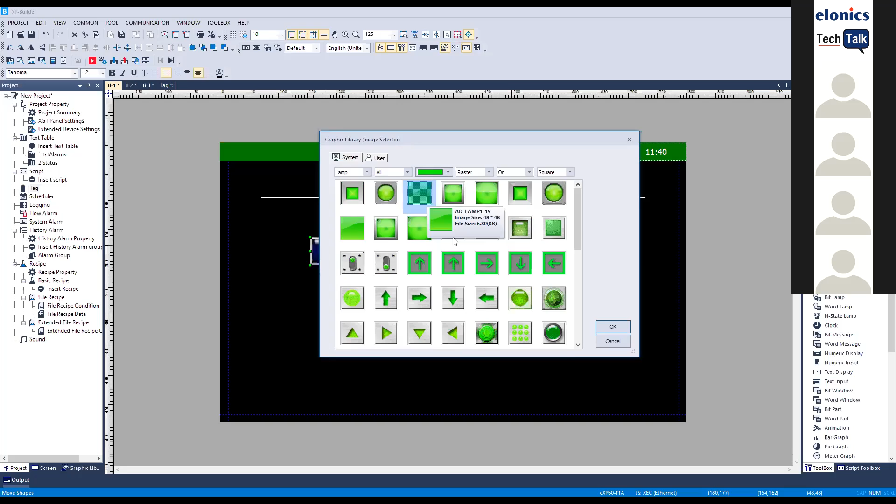So I'm just going to go back to lamp to make it easier. I'm going to select that. I'm going to give it text as well. Say use caption and just say start.

On off copy basically copies the same thing to the on state and the off state. So I'll say okay. Now this shows you that I've created a start button linked to marker word 10.0. You have a little button up here as well that, if you click on it, shows you what happens when it goes on and off.

So what we're going to do as well, let's make things easier because we're going to keep the same sort of button. I'll say Control C, Control V, then you can put it next to the other one. As you can see, it pins and shows you where the center is, which is nice and makes things a bit easier to line up.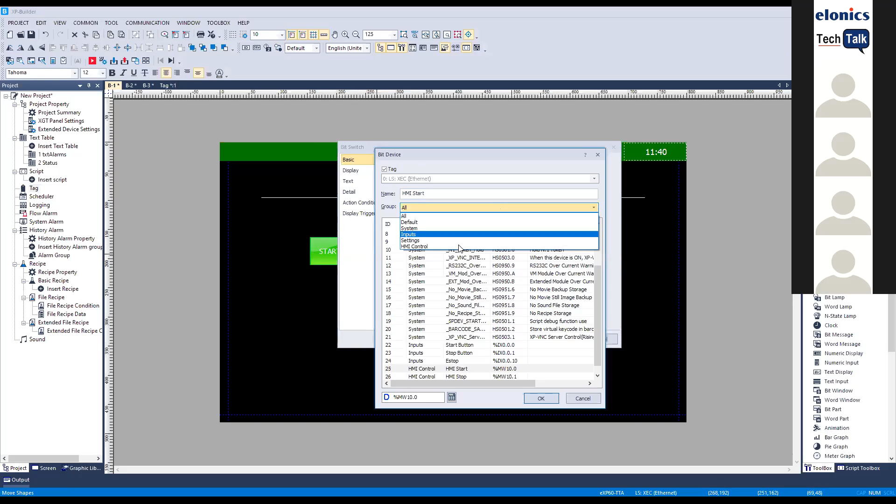So if we double click on that, I want to change this to HMI stop, go to my tag, but this time I want it to be red. I'll change my text to stop. Once again, on off copy.

So what will happen now is if I press start, it'll start the system. Press stop, it'll stop the system. Now we also want to view the status of that output. So once again, let's just say motor status there, and we had that one.

If you want to make the on button just change colors and use the exact same button to stop it again, is that possible? Yes, you can, but your PLC program will be slightly different now.

You'll use a different setup since then you won't have a latching circuit. You'll just have a single input contact to an output. You press it once, it goes on. You press it the second time, it goes off. We'll draw something up like that just now.

So we will link that output there. We've got a bit lamp, I'm just going to put a bit lamp in there. The bit lamp is basically just going to read from the status of a device. So I'm going to go on there, HMI control, Q 0.3.0 -- that's terrible, it's very US. Okay, then once again you can go display there.

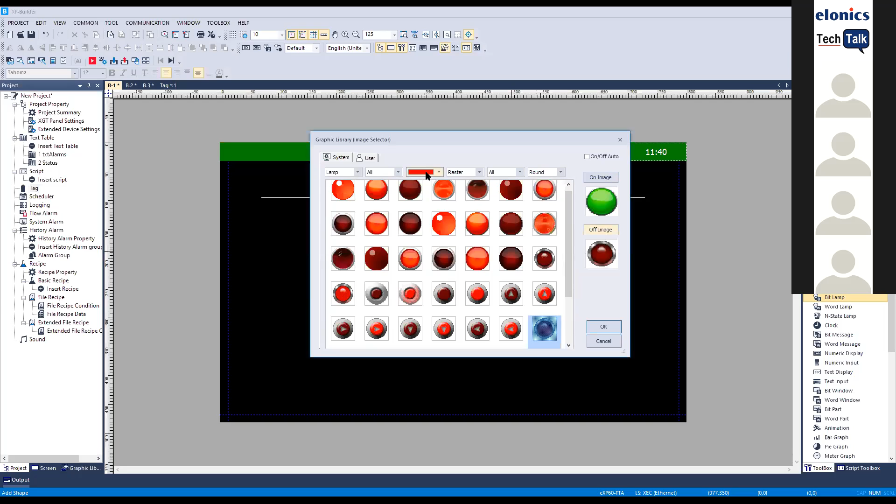So then you can see what it's going to look like. On, it's going to be an on red; off, it's going to be dark red. So what I like to do is say on image, I want it to be green. Select that. Off image, I want it to be red like that. Say okay, so that's the status there.

So once again, we can look at what it's going to look like. Say object on off, and that'll give you the state of that. So now as a quick demonstration, let's just show you how this is going to work. So I'm going to see if we can share.

Okay, let's go back here and let's just start the simulation. You have to start the XG5000 simulation first before you start the XP Builder simulation. Okay, so that's running. We're going to go back to XP Builder.

Okay, give me a sec. So XP Builder simulation is this little start button here. Click play. Okay, let's close that, play again. There you go. Okay, so this is a little simulator that shows you what we've created already.

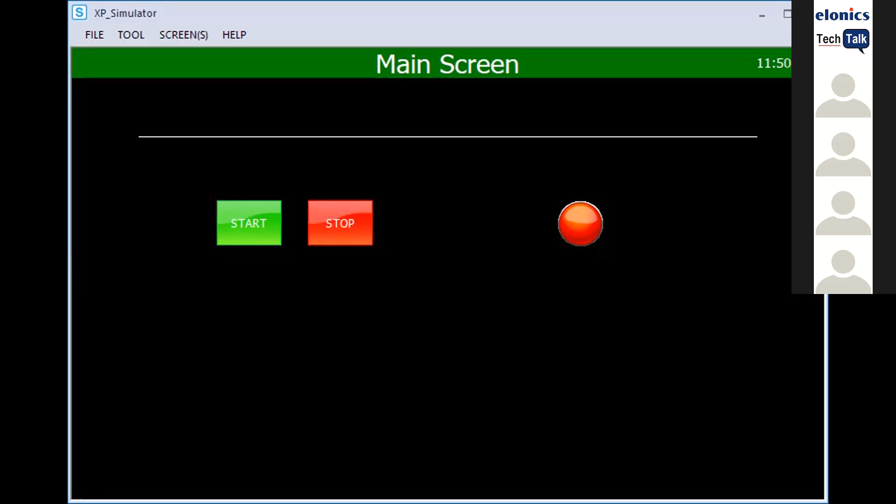I'm going to share the XP Builder again. Excuse me for one second, guys, I want to get some water.

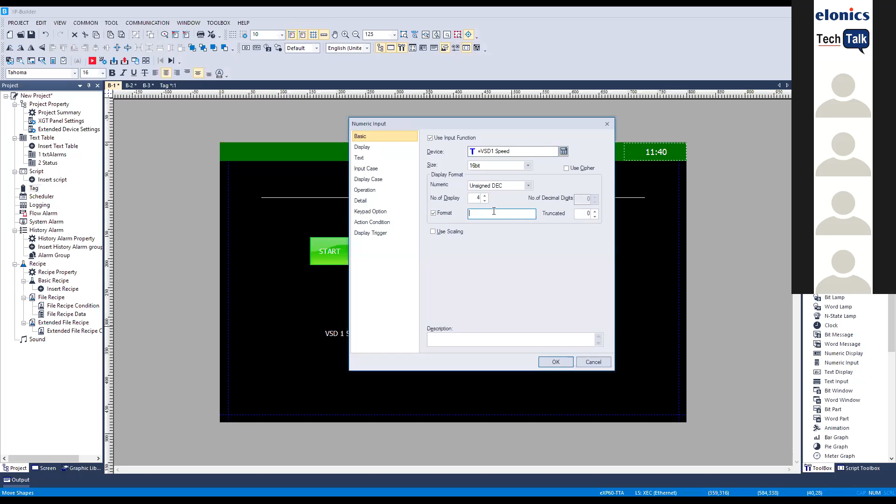Sure, Hertz. There's another way of doing this as well. Let's just move this out the way. I'll show you a little easier way. You can go to format. See, immediately it grays out the decimal digits. But to create the decimal digits, you can press star star dot star star, and you can say Hertz in that format. So you can tell it what format you want to use, and it puts it in there. So it gives you your unit in the display as well.

So when you download to the HMI and you tap on that, it'll give you a keypad, you enter your value, and it'll write to your PLC. So if I double click on that again, you can see use input function, which is what's nice. For example, you've created this in there. Now I realize, okay, I don't want it to be an input function. You can click on that. It'll purely be a numeric display only. See, as you can see, this changes as well. But right now, we're going to leave it as a numeric display, numeric input.

Say okay. So I'm going to start the simulator again. Starting the XG5000 simulator first. Okay. I'm going to go back into XP Builder. Start XP Builder. And you can see here.

0.0 Hertz. If I tap on that, the keypad will pop up. I want to go to 25 Hertz. I say 25.00, enter, and it gives me 25 Hertz.

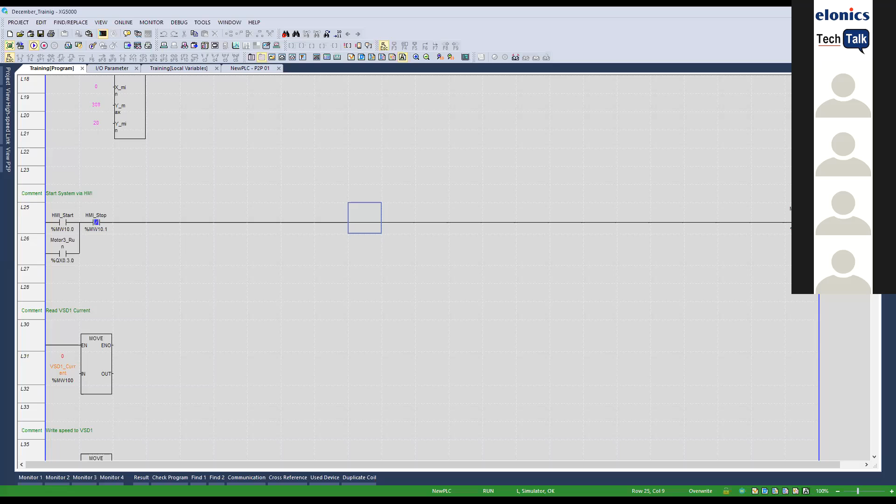Now I'm going to go into my XG5000 and share the screen again. And as you can see, value is 25 Hertz in there. So if I had to change that again, I'll change it to 30 Hertz, enter, and the value changes in there. So that's a simulation link between your XG5000 and your XP Builder software.

So I'm going to close that.

Okay, so now we've got multiple screens that we've added. We've got two other screens. We want to change screen. It's a simple little button called the change screen switch. You click on there, tell it which screen you want to go to. I want to go to screen 2 with that button.

A display, you can say library. Make it a blue button. Hold on, I just want to say off, so I can go library. On image I want it to be the same. Okay, text settings, on off copy. Okay.

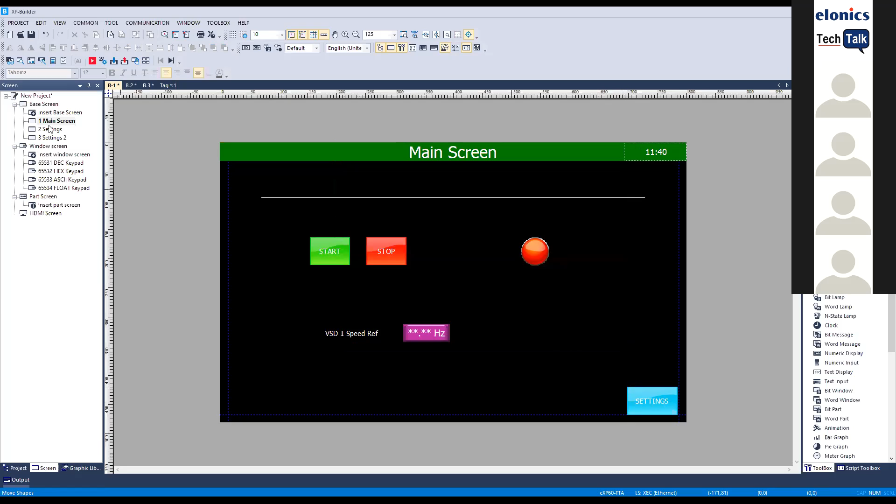So what that does, as it says, is a change screen shortcut. So when you press that button, it'll go to screen 2. And if you go to screen 2, go to settings. So I'm going to just copy this from here. I'm going to go to screen 2, put it on there.

But this time I'm just going to change it. I want to go back to screen 1. Text, I'm just going to say main. On off copy. And that takes you to a main screen. So that's very, very simple.

Then what's nice as well is we got something called multi-switch. If you use a multi-switch, what it does is it gives you one button that can do multiple operations. You can do a bit operation, switch a device on and off. You can do a word operation where you can actually write a value into a word as well. You can change the screen with the same button. So you can press a button, change the screen as well as switch something on.

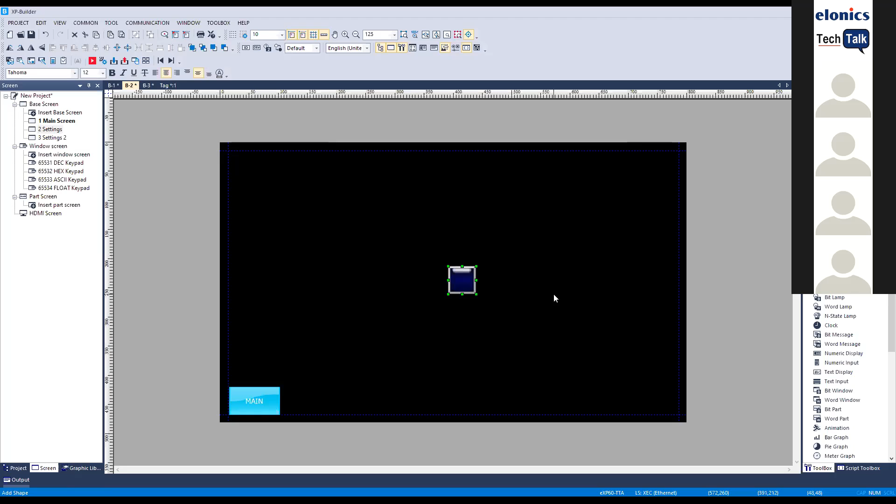There are times we are going to use that, and other times you're obviously not going to use it. So if you need to use multiple functions at the same time, you can use a multi-switch. If you're not happy with something that's there, you can tap on it and click delete.

The HMI also supports pie graphs, meter graphs, so you can add a bar graph in. Click on there, select the device you want to use. If you've got your analog value, your temperature, you can use that address as your temperature. Then you can set a range of up to 300, from 0 to 300, and the bar will fill up. You can design your bar as you want with different colors, transparent background images. All that's up to you as you design.

You can change the background of your screen. If you right click on your screen, go to screen property, and select background. You can use a background color, you can use a background image that you need. It's up to you how you want your HMI to look.

And also the history alarm viewer I was speaking about earlier. If you click on there, you want to set the number of rows, what state, which alarm group you want to look at. We're going to look at all the groups, for example. You want to display the restore filter, check filters, or display only checked. And you want occurrence, message, group, restoration. So this tells you what you want to view in your history group. If you click OK, this will display.

As you go through, this is going to keep filling up and you won't know what's happening, since every time there's a change, it's going to update. So to view and to scroll through your device, what we have are special switches.

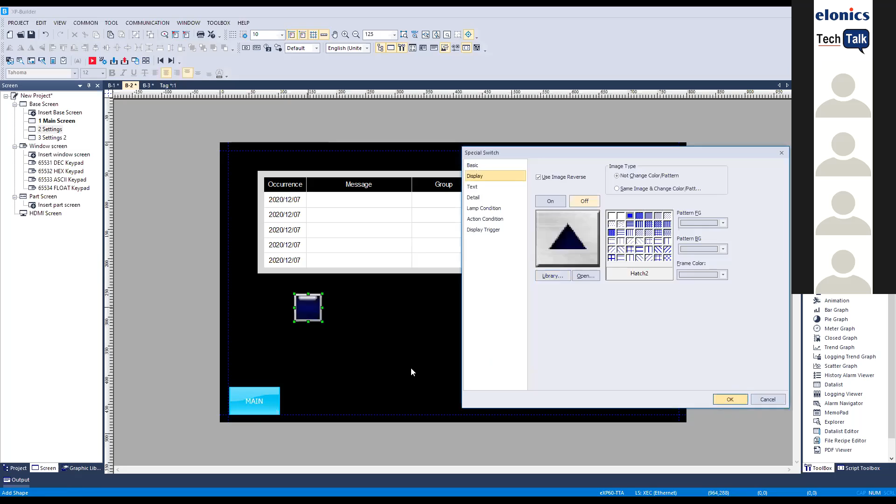If you click on special switch, this gives you the internal buttons that the HMI supports. We're looking at the history alarm viewer now, so we click on there. We want to go to history alarm viewer, line up, and click on that. That automatically registers that button to scroll line up. Say display, you can change the display to an up arrow. So every time you press up, it'll scroll up. You can copy and paste that.

Then we can set line down display, and so on and so forth. So your special switches control your built-in logging trends, trend graphs, alarm navigators, alarm viewers, data lists, logging viewers, that sort of thing. Your special switches control what's internal to the HMI.

Now we've done that, but we also want to make it look a lot better. So we have our built-in graphic library, but you may want to add more things into your library - stuff the HMI doesn't have, basically better looking images, your company logo, and that sort of thing.

The easiest way to do that is to click Add. Let's just call that logo, say okay. So it tells you logo is added, and you've got a logo tab now, and you want to add another image into it.

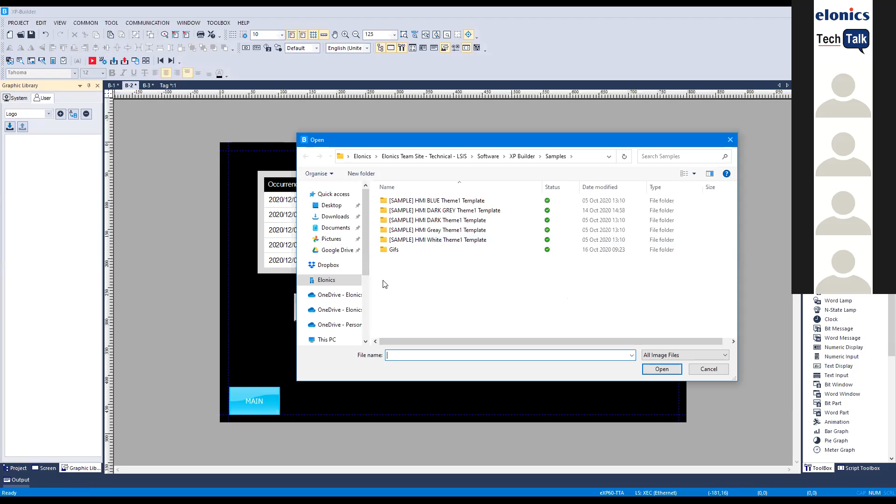If you right click on there, in the white blank spot, say insert image, and then you can go into wherever you've downloaded images. For example, I'll go into pictures, save pictures - there's nothing in there. Let's go to photo galleries and say open, and it adds that in there. So if you want to add that image in, you click on image, click user now, select that, and it's going to add the image in.

So you can add your company logo, you can add all that in, and then you're good to go. Very simple - you can add multiple images. If you want to add another image, right click, say insert image, and you can go into your pictures.

Any questions so far?

Yeah, can you make that picture like a watermark?

No, you can't do that directly, it's behind your text and all that stuff. You have to create an image that looks like a watermark, then click it and send it to back, so it stays behind everything else. But it'll read the raw image as it is. You can right click on that image and say send to back. It doesn't have to be a watermark, the other stuff can come in front of it. Yes, you can send that to back, or you can bring just particular devices to the front.

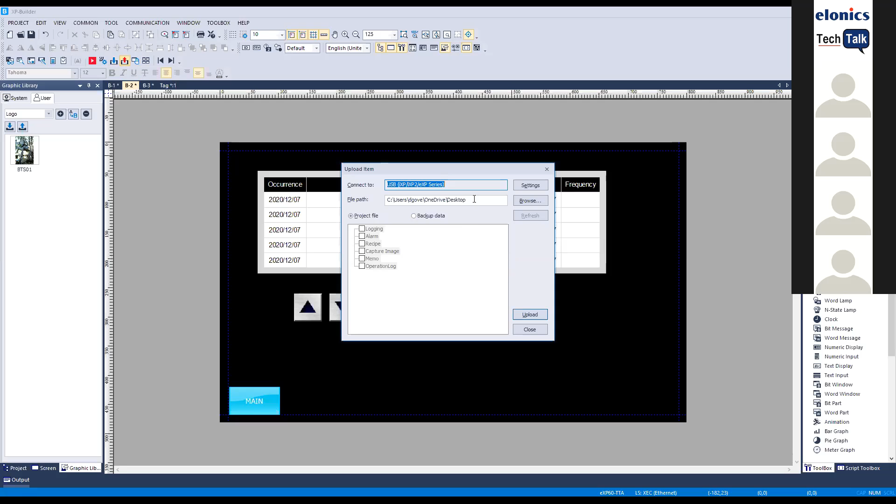Okay, any questions?

The HMI can get quite in depth, so there's actually quite a bit to go through, especially when it comes to alarm history. So I tell guys, when you're doing a project and you require that, I will help you personally, privately, and we can sort that out for you. Based on what your project requires, I can assist with that, because going through explaining every little detail in an HMI will take forever. So as you design HMIs and say, okay, I want to use this function, how do I do that, then I will assist in that sense, because then we'll have stuff to work with, addresses to work with, information to work with, and we can do that.